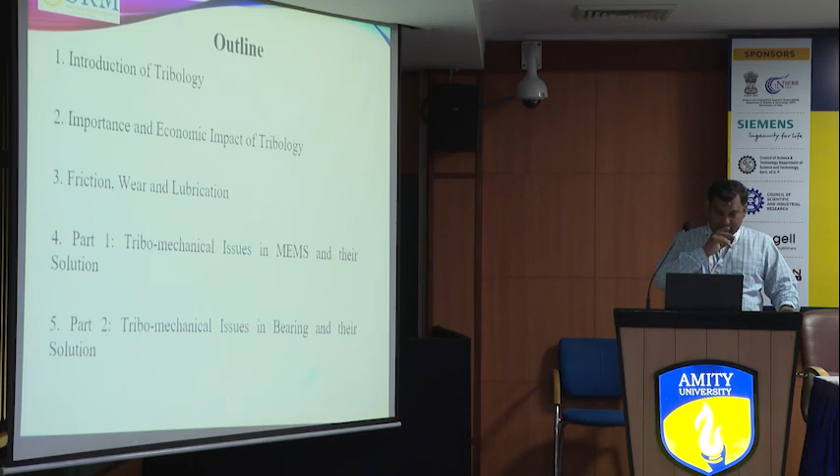So it means that your lubrication, whatever coating is provided over the hard disk, that is a silicon disk, is completely eliminated and your system is gone. So that's why tribology is everywhere. Wherever you want to apply it, just think of which area you want to work in. That is very important. So we show our two parts, our results, the tribomechanical issues in MEMS and their solution, and how we can improve the wear life without adding any lubrication. That is the main thing. So tribology is nothing but when two bodies are interacting with each other.

Then what happens when there is relative motion between bodies at the interface? Friction will occur. Due to that friction, frictional heat occurs, and that causes wear. How can we reduce this friction and wear? We can add lubrication. So it is known as the study of reducing friction and wear by the addition of lubrication.

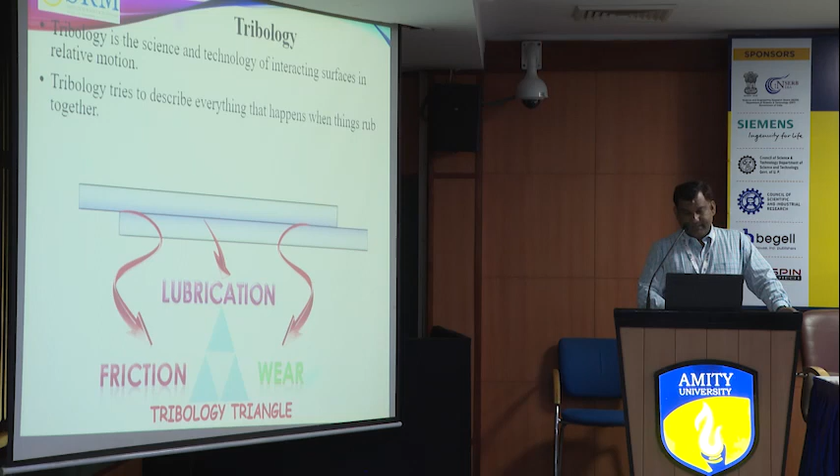This lubrication can be in the form of liquid, solid lubricant, or semi-solid lubricant such as grease. So lubricant is very important at the interface wherever relative motion is there. It is very important in terms of safety, efficiency, and reliability of components, and it is in all departments: whether you are in material science, biotechnology, civil engineering, automotive engineering, mechatronics, or any

department. So it is kind of an interdisciplinary field where you can work to enhance the reliability of the component, efficiency of the component, and sometimes safety, because in a car we require safety. That is very important. Also, whatever components we are using must have a longer life, because if the brake material fails very early, it is too costly in the car. So the life of the brake material should be high. That is called a friction material.

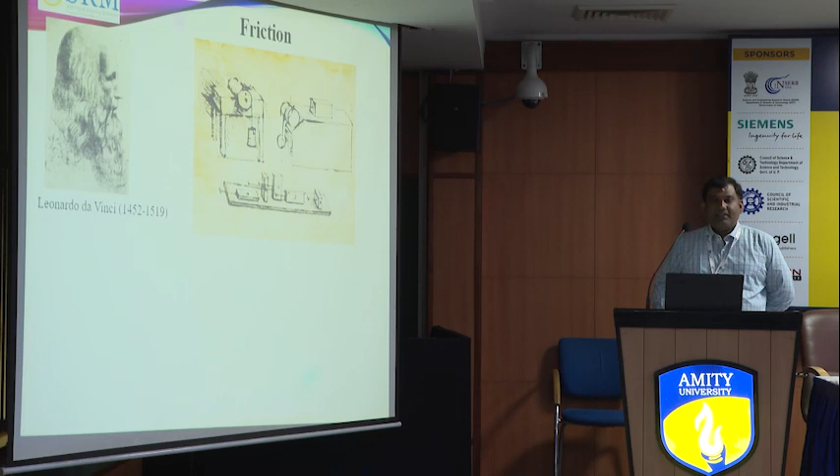Friction was first described by Leonardo da Vinci; he made sketches. These are the three sketches, which were later described by Amontons, so you know them as Amontons' laws. But Amontons only saw those pictures and wrote according to them, nothing else. Leonardo da Vinci was the first person who made such sketches. From this first sketch, friction is directly proportional to the normal reaction. Amontons' second law says that friction is independent of the surface area.

That is macro scale, but nowadays that law is not true, because it does not tell what type of area, either apparent area or real area of contact, because every material has its own asperities and surface roughness; no surface is perfectly smooth, whether metal or ceramic. So that's why nowadays it is changing to the real area of contact.

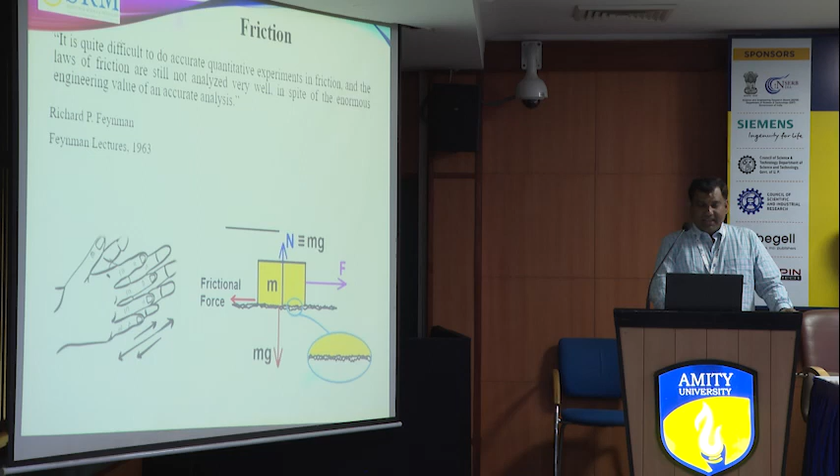So till now no such experiment has been developed where we can say that the friction is this much for that material. We can't quantify friction for the same material, because as I told you, the surface always has asperities, and maybe not all asperities are in contact, maybe only one or two on that particular surface. That's why whether you place your surface like this or like this, your friction never changes. And a simple example: when you rub your palm, it warms due to frictional heat.

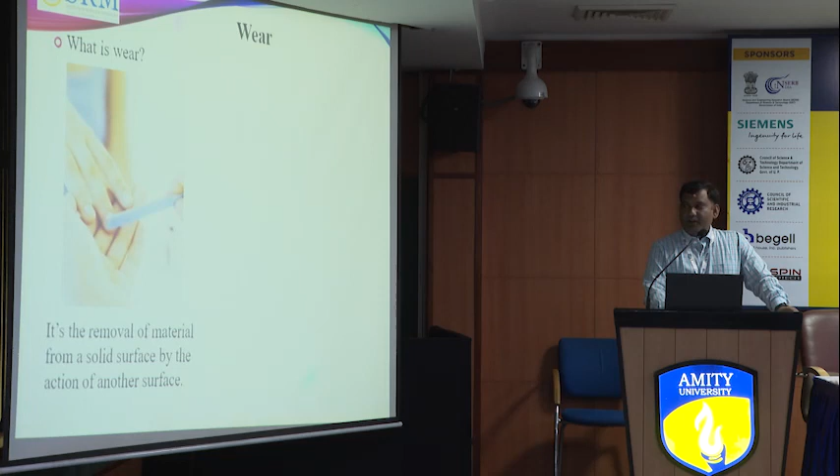In the famous 1963 lecture presented by Richard Feynman, he said that friction is still not well understood in this era. Another point: what is wear? Wear is material loss, just material loss. That material loss is known as wear.

Erosion is also one problem. Hydro turbines, in whatever hydropower plants we use in India or abroad, fail due to silt. That is due to erosion. So that is the basic understanding of what erosion and corrosion are. Erosion is a physical phenomenon, and corrosion is a chemical phenomenon.

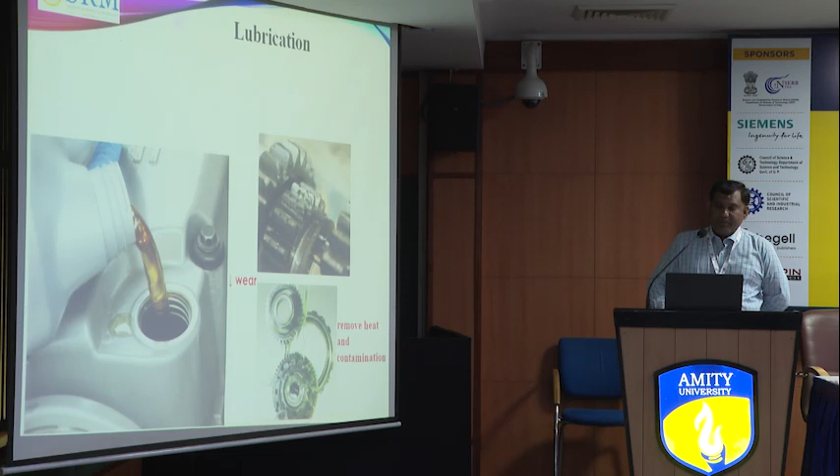Further, when we add a lubricant to enhance life, the function of the lubricant is to remove heat by increasing thermal conductivity, remove contamination, and remove debris from the surface, so that your material will not fail. There are four types of regimes, described by Stribeck, the German scientist.

Stribeck defined four regimes. When there is asperity contact and a very thin film between the two mating surfaces, that is known as boundary layer lubrication. Boundary layer lubrication occurs in clutches and bearings, where a very thin film occurs. Displaced boundary means your load is very high and the asperities are compressed. That is called a displaced boundary layer.

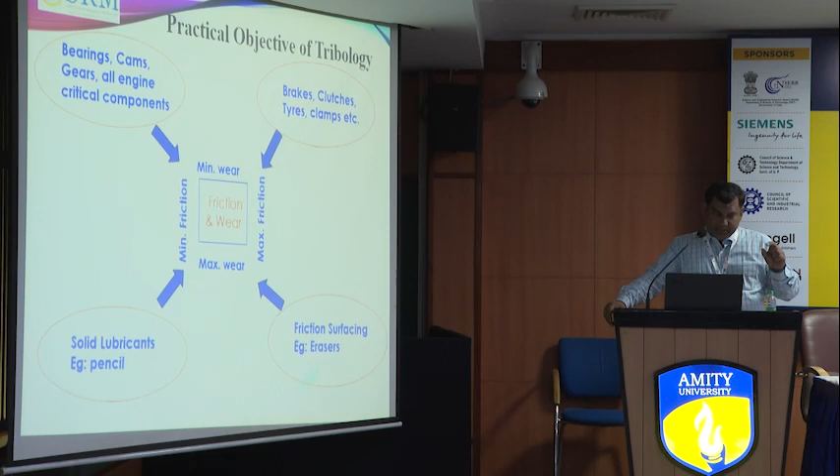Sometimes it requires minimum friction and maximum wear, like when you write with a pencil. When you write, you require less friction so you can write over the paper, but your pencil lead should wear, otherwise you can't write anything.

So these are the different areas depending on what area you want to work in and what is your objective. According to that, you can select the material and then select the proper parameters in that particular tribological field.

Nowadays we are using materials for fabrication of MEMS such as silicon, quartz, piezoelectric crystals, and polymers also. Polymer is like PMMA. There are two kinds of polymer: positive photoresist polymer or negative photoresist polymer.

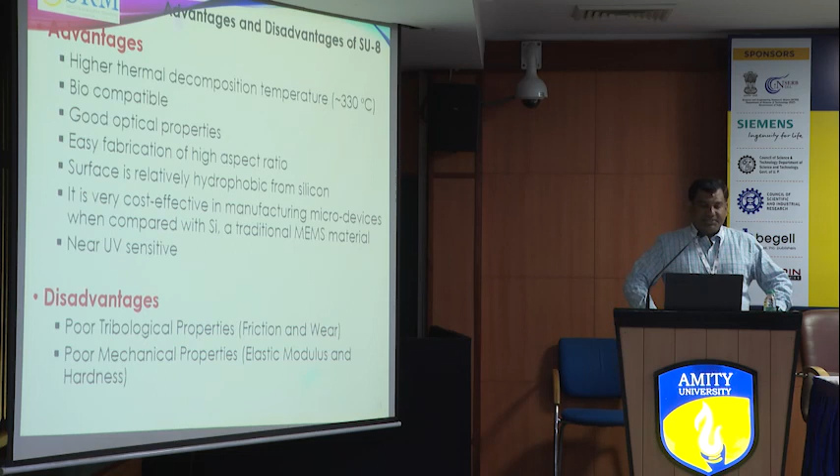The only disadvantage of SU8 is that it has poor tribological properties and poor mechanical properties. These are the only disadvantages. If we can improve these disadvantages, that material is very good for fabrication of MEMS components.

So in this work, what we did - this was my doctoral work, which I did during my doctorate at IIT Kanpur - I added graphite and talc.

Firstly, I added all carbon fillers. Then I found that graphite is good, either graphene or multi-wall CNT. Then in literature, I found that talcum powder, whatever you use on your face, the base talc, without adding any chemical, was also a very good solid lubricant. So I thought that because talc has the OH group, it very easily makes bonds.

So I thought to mix the graphite with talc in the same proportion, 5% meaning 2.5% talc, 2.5% graphite. So very good bonding happens because of the OH group present in the talc.

And I also found that for this research, without adding any lubricant, friction from SU8 has a 0.6 to 0.7 coefficient of friction. So by adding this graphite and talc, we reduced it to up to 0.2.

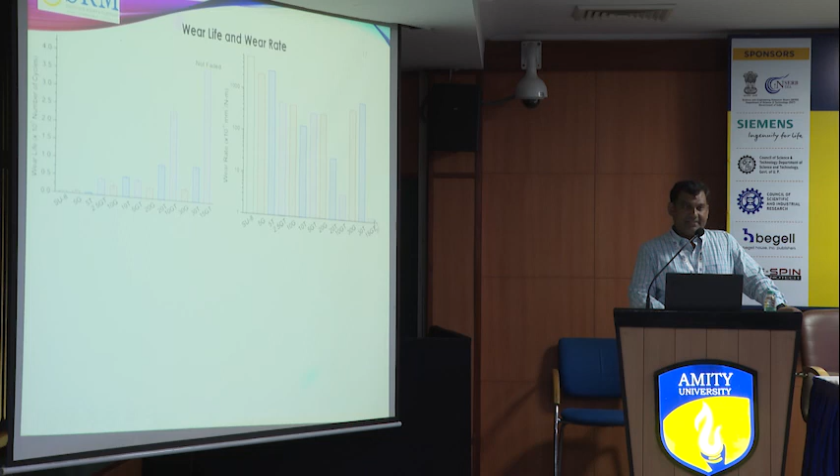But we were not able to achieve below 0.1 — that was the main goal. So we added a liquid filler also along with the solid filler. This work was done by my PhD student, and they used HBN, hexagonal boron nitride, known as white graphite, and added the liquid lubricant with HBN also.

Due to these nanotextures, the wettability is increased, meaning the surface — pure SU8 is hydrophilic in nature. Hydrophilic means water contact angle less than 90 degrees; hydrophobic means water contact angle greater than 90 degrees. Because of this addition of filler, the surface becomes hydrophobic, and we can achieve approx 95.7 degrees — that was hydrophobic in nature.

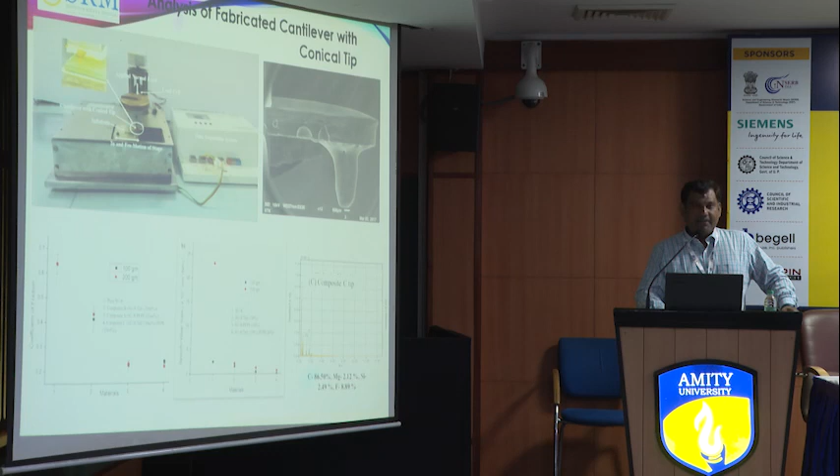Then after that I also fabricated the composite tip, that is micromechanical, we can see that is a few microns, 500 micron, and we obtained similar results, so we concluded that particular thesis. And similar EDX results showed that transfer of the fluorine is there, due to which your friction is less and life of the tip is also improved.

So now we move to the next part, that particular bearing. So why is there a need of tribology in bearings? It fails, it can create cavities due to low oil supply, due to poor running conditions. All these factors mean your bearing fails fast. So how can we improve it? And nowadays our green environment is very important, because when we are using bearings, we require external lubricant.

But nowadays government is telling that we can make the green environment. So how can we make the green environment? Only by not using more lubricant. So that is only possible by addition of the polymer.

So some researchers say coating is one solution. In coating, there are two types: hard coating and soft coating. Soft coating is good for coefficient of friction, but not good for wear, it will fail fast. Hard coating is good for wear resistance, but not good for the frictional coefficient. So what people have suggested in literature is that we can make a sandwich. We can use both properties. We can make hard coating, then soft coating, then hard coating and soft coating as per our requirement, at few nanometer scale. So that was the beauty. Then we can increase both, we can get low coefficient of friction as well as high wear resistance property.

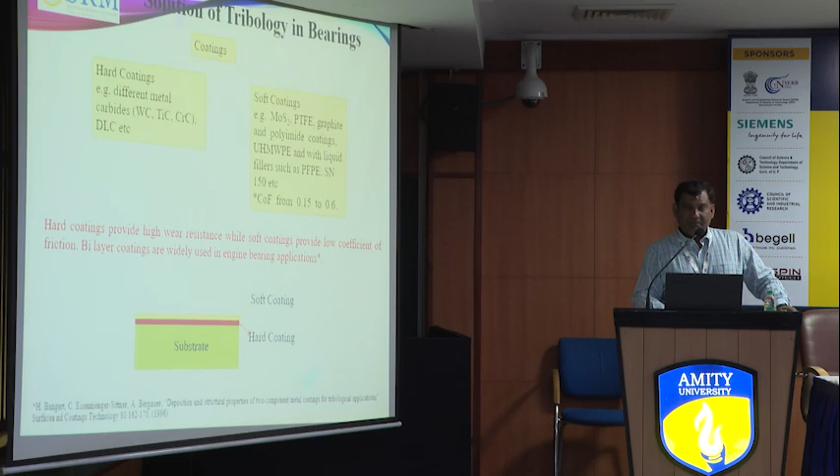So that was the solution proposed by researchers. And after that I also did adding the coating and water contact angle test. I checked it and it is hydrophobic after adding the filler. And you can also see that the elastic modulus is also improved. Then coefficient of friction, you can see EGSN means epoxy graphite, SN is the base oil, that is group 5, SN150 that is used in automobiles. And we can get 0.1 without any lubricant. And these tests I ran up to 24 hours. After 24 hours, I only get the data and that is presented. So approximately why it is there.

EGSN, you can see here the nanotextures are formed. Due to the nanotextures, the surface is hydrophobic, and due to the hydrophobic property, adhesion is less, and it shows low coefficient of friction. And wear is also very minimal, we can't observe it, and when we enlarge it, there is a very smooth surface you can observe. And it was tested at 2 Newton load. So these type of coatings are helpful for low load applications. High load applications, there is still a research gap in this field, so you can think of how we can develop for high load also.

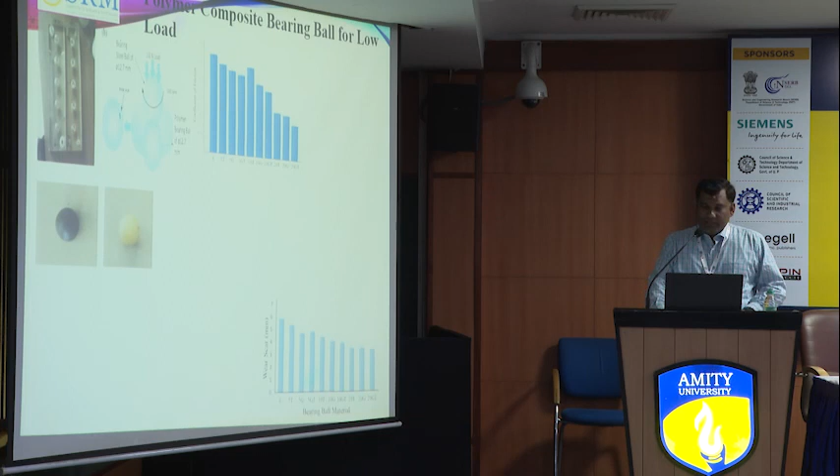Coefficient of friction, we can see here graphite talc still gives the lowest coefficient of friction. So here no lubricant we are adding. We are only adding the graphite and talc. And pure epoxy, you can see immediately it will fail, and sometimes due to the heat, it is re-solidified at the interface. So these are the observations which we observed.

But in case of the graphite and talc ball, we have not observed that much scar. Only plastic deformation occurs that changes the shape, but it does not wear out. Okay, so that is also used for low load applications, like in your chairs. You can use it where no lubrication is required. It is very helpful. And also if your wear scar is less than 4 mm, then it is in the acceptable range, that is the ASTM standard. So the graphite talc bearing ball is acceptable in nature.

And further we have tested for compressive strength and hardness of the polymer. You know that we only tested the Shore hardness test. We are not conducting Rockwell, Brinell or Vickers hardness test. That is only for metal. So for polymer, the Shore hardness test is only used as per the ASTM standard, and we observe that the graphite talc ball is good in terms of the compressive strength, and in terms of the wear scar also.

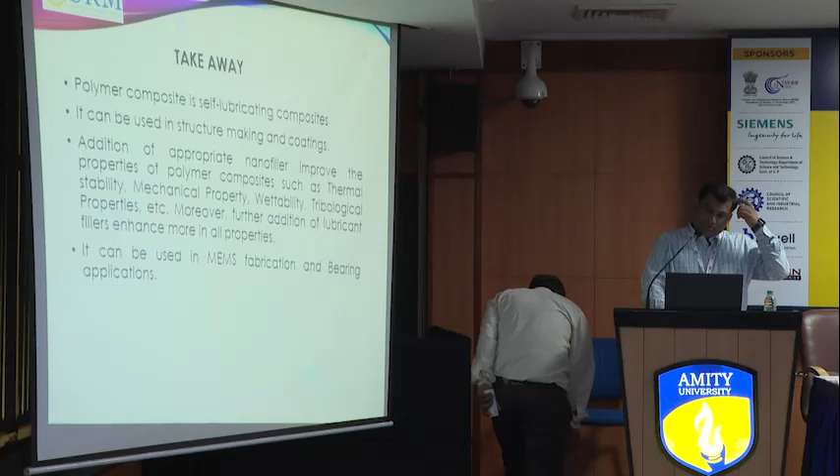So this is the final slide of my presentation. What is the takeaway, or what you can do further in your masters if you are interested, or in your doctorate. You know that the polymer is self-lubricating, and you can play with the fillers, and you can enhance the property as per your application. You can select the fillers, and after addition of fillers, either micro or nano fillers, you can enhance all the properties, and you can use this for MEMS fabrication and bearing applications.

Another way is the polymer paint, which we are doing in automotive. That research work one of my PhD students is still doing. He is going to develop the polymer paint for anti-wear, anti-corrosion, and antibacterial tests we will conduct, because in the automotive or transport sector we require antibacterial paint, so bacteria can be repelled. So you also maybe saw some advertisement from Deepika Padukone saying this is the antibacterial paint. Now no bacteria comes inside your house, it reverts back the bacteria from your house.

That type of development, Nerolac or Asian Paints, they are spending huge money in developing antibacterial paint. So that is one research work which recently one of my doctorate students is doing. That is for automotive application. They are developing the nanocomposite paint which can show antibacterial, anti-friction or anti-wear and anti-corrosion properties, because these three things are very important for any automotive. And that has succeeded also, because one BTech group did it, a startup based on that particular thing.

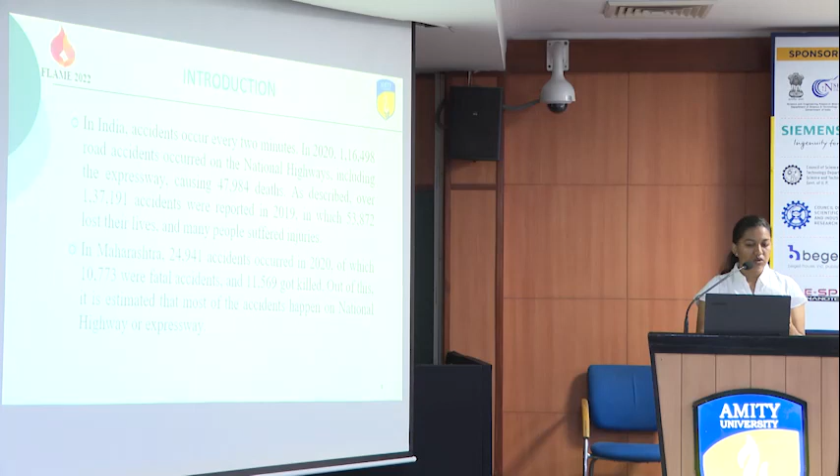So among all the accidents that are occurring in India, most of the accidents are occurring on national highways, state highways and expressways. So specifically in Maharashtra, 24,341 accidents occurred in 2020. So this is the latest data which was gathered from the National Authority of Highway, India.

So for this research, basically we identified the accident spots on the Nagpur-Amravati highway. So the names of these accident spots are 8th mile, Vardhaman, Chokardhani, Bajargaon bus stop, Junapani bus stop, Oriental Plaza, Karanja Gadge bus stop, Satnavari. So these are the accident spots which we found on the stretch of the 75 kilometers Nagpur-Amravati highway.

So some of these advanced technologies are suggested through this research paper, but very little research emphasizes such cases which happen due to lack of ambulance availability in the area or absence of ambulances. So the major problem with this Nagpur-Amravati highway is that ambulances are present, but in less amount. Also, in some areas there are no ambulances. So for this purpose, we are using the Minimax and K-means clustering method to identify the proper location of ambulances so that the response time after the accident occurs can be minimized.

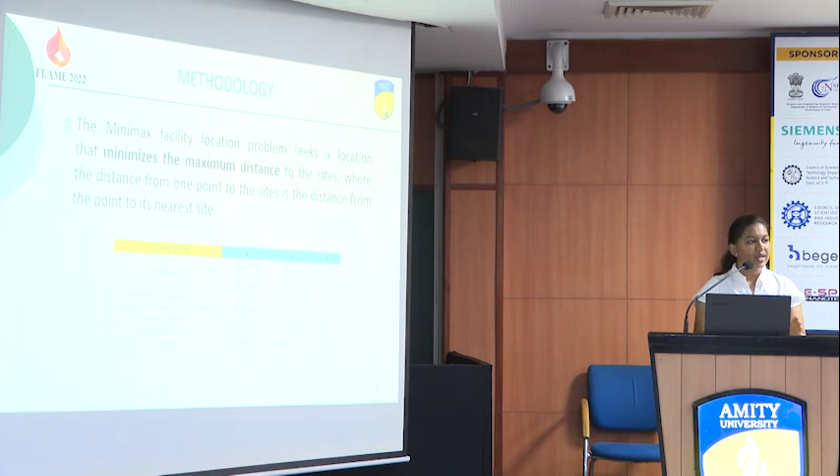So this is the Minimax facility location problem. This Minimax method is used to minimize the maximum distance between these 2 points. These are the accident spots which we identified, and this H represents the Minimax location for these accident spots. This minimax location is basically two coordinates, and the line joining these two coordinates will contain the ambulances.

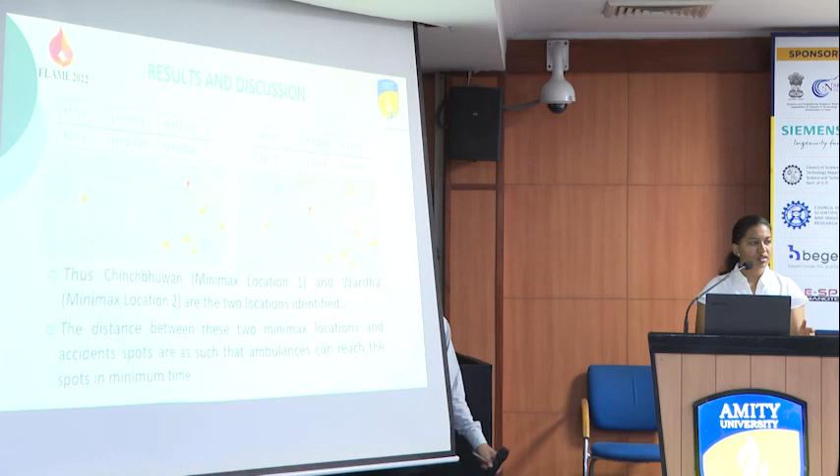So our result was that we found these two locations, which are Chinchbhuwan and Wardha. Placing the ambulances at these two specific locations can reduce the response time of the ambulances to reach the accident spots. Chinchbhuwan is for the first cluster, which consists of 5 locations, and Wardha is for the second cluster, which consists of 3 accident spots. We are trying to reach the authority so that we can conduct a survey of how much time can be reduced by placing these ambulances at the identified spots.

So this was the study that we did. These are the major references, some of which I mentioned while speaking about the literature review. Yes, thank you. Yes, sir. Any questions from the audience?

So you have used k-means clustering. Is any other algorithm available which will give better results? Sir, to evaluate if we are using a correct algorithm: k-means clustering will give us the number of clusters to be made. To evaluate if we are using the optimal number of clusters, we have used another method called the gap statistic method. To inspect if the number of clusters is optimal or not, there are basically 3 types of methods: elbow method, silhouette method, and gap statistics. So along with this, we are using the gap statistic method.

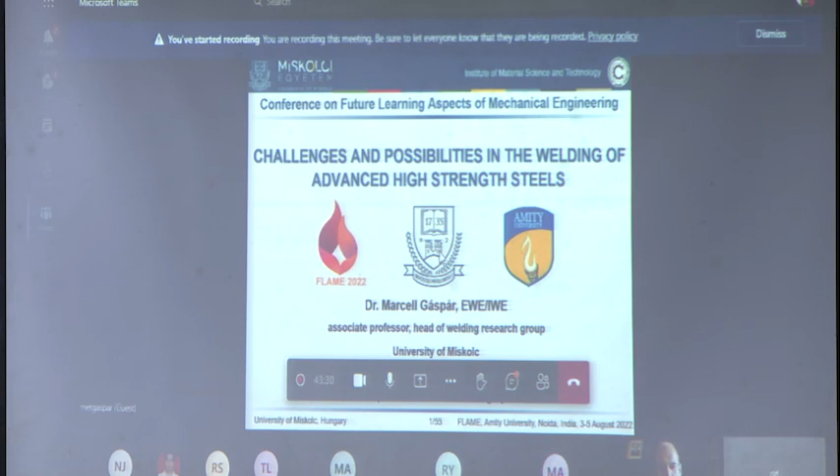Thank you very much. So it's a big honor to me that I can have this presentation today in India. Actually, I have a very good knowledge about your country. Even at our university, we had some colleagues from India, and I'm very interested in the country and also the technology development and university activities there. I really hope that in the future I will have the chance to visit the country.

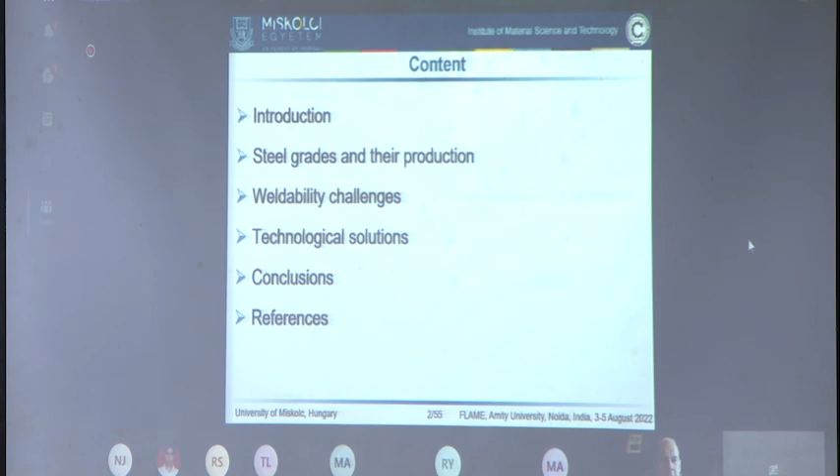In my keynote lecture, I will have a general presentation about the challenges and possibilities in the welding of advanced high-strength steels. In my presentation, I will have some introduction about our university and our research activity. Then I will have some information about different kinds of high-strength steel grades and their production processes. Then I will continue with the weldability challenges, and finally I will try to provide some possible technological solutions for how we can handle these new generations of high-strength steels.

And besides the automotive industry, there is also the production of trains, for example at Alstom or Stadler. So there are a lot of companies working in this automotive sector, and you may know that most of the application of high-strength steels can be connected to the vehicle industry.

Some small information about our university. The University of Miskolc was among the first technical universities of the world. Actually, our predecessor was established in 1735 in Selmecbánya, which today belongs to Slovakia. And then in 1949, the university moved to Miskolc, to my hometown. And nowadays we have 9,000 students in 8 faculties.

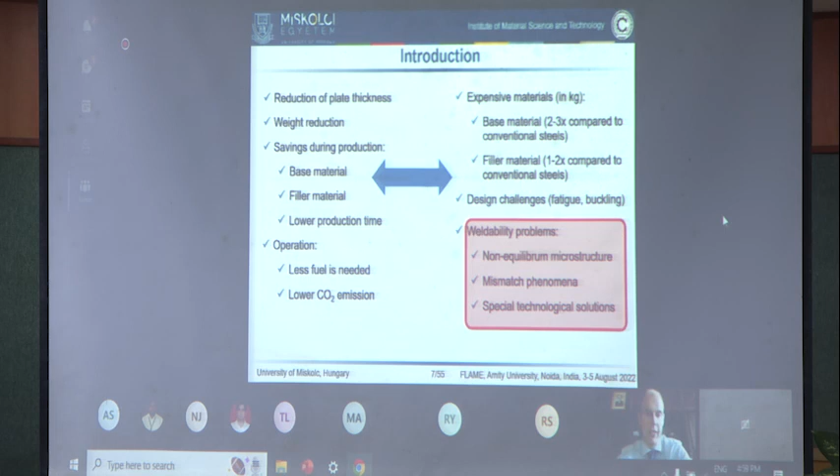Weldability is also a hot topic. Basically, these steels have a non-equilibrium microstructure, mostly martensite-bainite microstructure, and different kinds of variations. Even sometimes some austenite content can be identified in the microstructure. The mismatch phenomenon is also a hot topic, how we can select the proper filler material for the welding. And of course, special technological solutions are needed to have at least similar strength and toughness of the joint as the base material. In my presentation, I will focus on the weldability topics, but based on this screen, you can see that it's a more complex problem. And now I would like to continue with the introduction of different kinds of steel grades and their production.

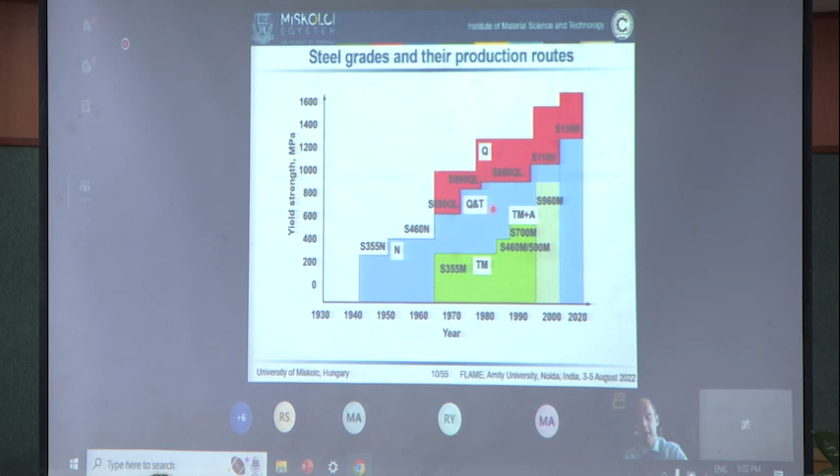As you can see, with this technology, we can reach nowadays even 960 megapascal. So there is approximately a 15-20 years difference between achieving the same strength grade by the different kinds of technology, but the TMCP process can be considered as quite competitive compared to quenching and tempering.

Related to the production processes, during normalizing we are using a simple heat treating process with one cycle. We go up to the homogeneous austenite region, and then we use simple air cooling.

In case of quenching and tempering, we need to use much faster cooling. Therefore, water cooling is used, followed by high temperature tempering under the A1, producing martensite after water cooling, and then tempering to create a more equilibrium microstructure with some carbide precipitates. This is generally called sorbite.

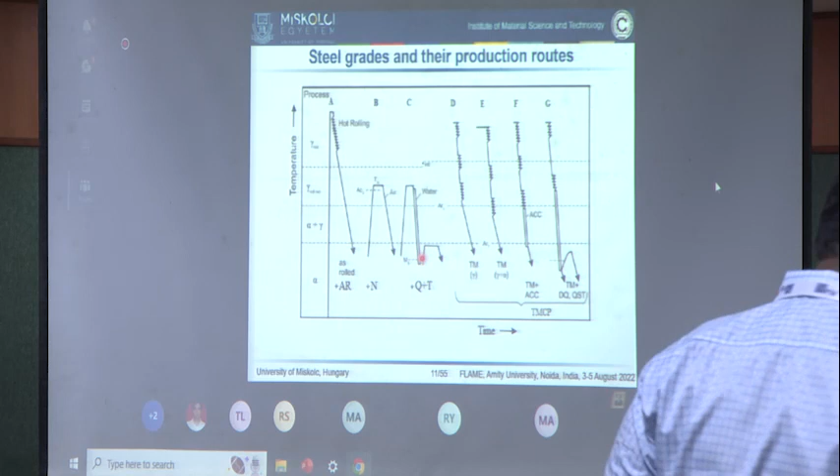Related to the TMCP process, different kinds of processing routes are available. Generally the process always starts with hot rolling, but then the rolling process continues even at much lower temperature, around the A3 temperature, and sometimes even below the A3 temperature. Then very fast cooling is used. Therefore, an extremely low grain size can be achieved with this technology.

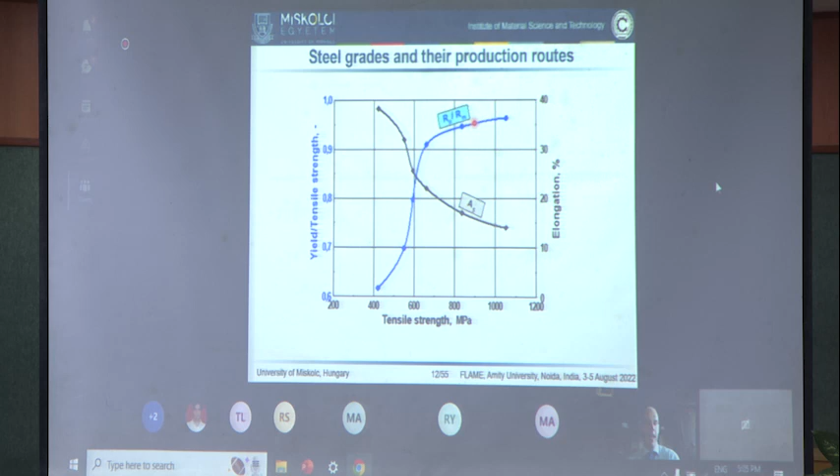When we would like to apply high-strength steels, we should consider that with increasing strength, generally the elongation, so the ductility, is reducing. If we compare the ratio of yield strength and tensile strength, we can see that above 600 MPa this ratio is quite close to 1, meaning there is no plastic difference between the yield strength and the tensile strength, and in parallel the ductility is reduced as well.

How can they achieve these high strengths? Besides the processing routes, different kinds of alloying elements are needed. Firstly, I should highlight the substitutional solid solution elements, such as manganese, silicon, chromium, or molybdenum. Besides them, there are also interstitial solid solution elements, of course carbon, and in some cases nitrogen.

Microalloying elements have a very important role in high-strength steels, especially in high-strength low-alloy steels. We can find aluminium, titanium, niobium, vanadium, and boron in this kind of high-strength steel. Especially in the quenched and tempered group, we can find boron in order to increase the hardenability, the so-called quenchability, of high-strength steels.

The steel producers generally focus on reducing the sulfur and phosphorus content in order to have high toughness in these steels, and they are also using, as I mentioned before, heat treating and thermomechanical rolling.

With these technologies, a very fine-grained microstructure can be achieved, which is generally a non-equilibrium microstructure with a combination of martensite and bainite, but also different kinds of carbides, retained austenite, and in some cases ferrite can be identified in these high-strength steels. Some measurements have shown there is also a higher dislocation density in the material, which results in higher strength, and there are precipitates thanks to precipitation hardening alloying elements such as chromium or molybdenum, which can be considered carbide former elements.

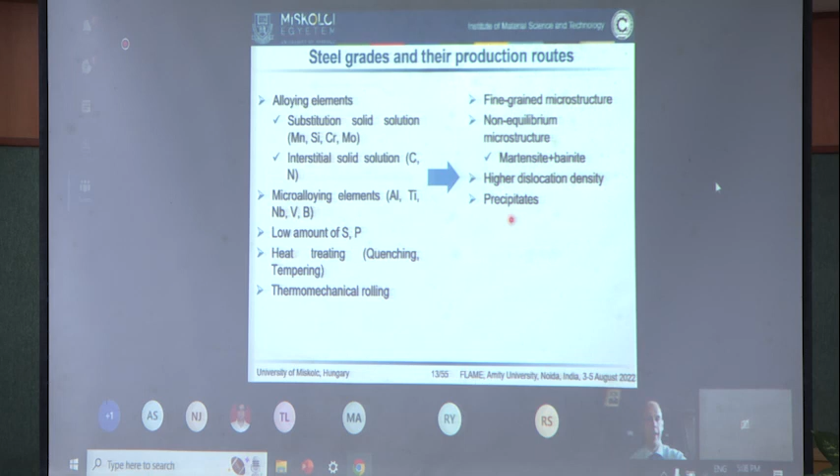Now I would continue my presentation with the weldability challenges. If we consider the weldability of different kinds of structural steels, the best option is to use the Graville diagram.

This diagram has three areas. In the first area you can find those steels which are very easy to weld without controlled heat input and preheating. In the second zone you can find steels which are a bit more problematic, but generally they can also be welded without any cold cracking. And in the third area you can find the most sensitive steels, where high cold cracking sensitivity is identified and where you need to use preheating and also controlled heat input.

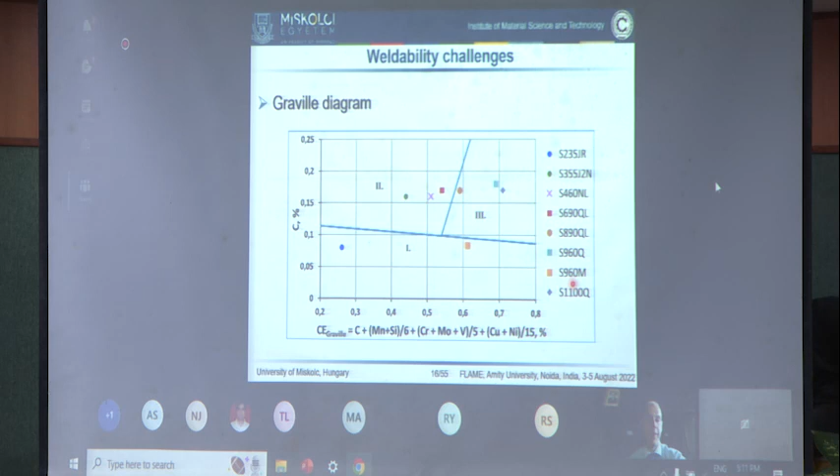If we consider quenched and tempered steels and TMCP steels of the same strength categories - for example the 960Q steel, which is located in area 3, and the 960M steel, which is located in area 1 - we can conclude that the thermomechanically rolled steel from the same strength category is less sensitive to cold cracking and therefore much easier to weld, even without the use of preheating.

The third interesting topic is the filler metal selection, the so-called mismatch ratio. It's always a question whether we need to use a matching, under-matching, or over-matching filler metal, and in which kind of filler metal we can make a better quality joint in terms of the different kinds of loading characteristics.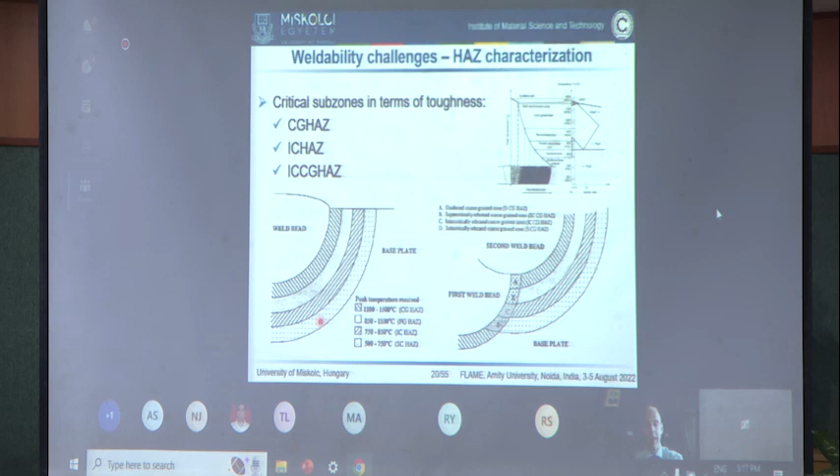During the weldability challenges, the heat-affected zone characteristics are always in focus of the research. In terms of toughness properties, generally the coarse-grained heat-affected zone, the intercritical heat-affected zone, and the intercritically reheated coarse-grained zone are considered as those areas of the joints where there is the lowest toughness.

This kind of intercritical coarse-grained zone can be formed when there is a multipass weld, and you can see that after the first weld bead there will be a normal coarse grain zone, but due to the heat input of the second weld bead it will be heat treated again. That part which will have intercritical heat treating - this will be the so-called intercritical coarse grain zone, where generally a large amount of local brittle zones are formed in the welded joint.

Here you can see that in case of the 960 quench and temper steel, we performed optical microscopic analysis and microhardness examination on a real welded joint, and we can identify that in this intercritical coarse-grained heat-affected zone, the inner part of the grains generally softens compared to base material, having a hardness of maybe 200, 260.

But at the original, the primary austenite grain boundaries, where these local brittle parts, mostly martensite-austenite parts, form, the hardness can go up even to 360, 330. So this is showing the special characteristic of the microstructure, which should be focused on during the research.

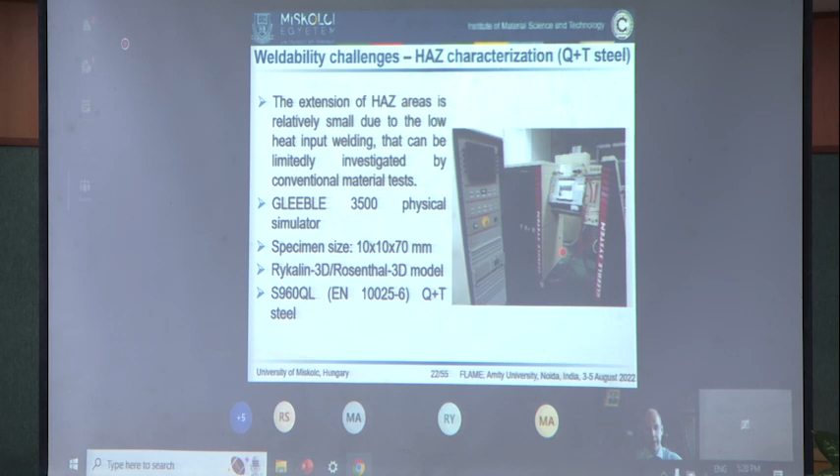During our experimental work, we analyzed the heat-affected zone characteristics of this 960 quenched and tempered steel. For the coarse-grained heat-affected zone, we used a 1350 degree peak temperature. For the intercritical heat-affected zone, 775 degrees Celsius peak temperature, and we used a combination of these for the intercritical coarse-grained zone.

We analyzed the characteristics of the heat-affected zone based on the T8/5 cooling time, which is very crucial in welding, because this is the cooling time between 800 degrees Celsius and 500 degrees Celsius.

Generally, 2.5 seconds illustrates laser beam welding or electron beam welding circumstances, while 30 seconds or 100 seconds can be relevant for submerged arc welding or other high heat input technologies.

Here you can see the simulated heat cycles for the coarse grain zone, the intercritical zone, and the intercritically reheated coarse grain zone. All of these curves were generated based on the Rykalin or Rosenthal 3D model.

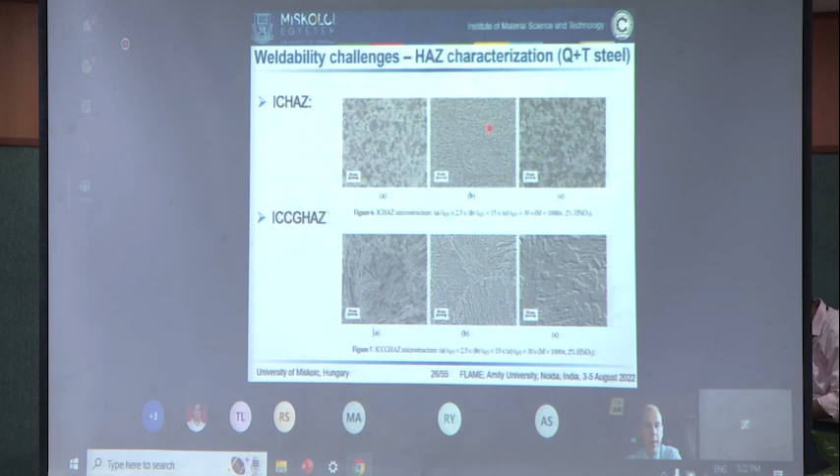If we consider hardness properties in terms of cold cracking sensitivity relative to base material, we can say that as we reduce the heat input, hardness increases, but generally there is no risk of reaching the requirement of 450, which would indicate high cold cracking sensitivity. Softening generally does not occur much in these steels, though sometimes with high heat input in the intercritical zone, some softening can occur.

Compared to 960 versus a conventional S355, we can see that at medium or high heat input, there is a large difference in the hardness of the coarse grain zone. But as we go down with heat input and cooling time, the hardness values become quite close to each other.

Regarding impact energy and Charpy V-notch test results, we can say there is a very significant toughness reduction in the heat-affected zone. The base material often has toughness even 160 joules at minus 40 degrees, but generally the impact energy values decrease to the level of the limit of the governing standards.

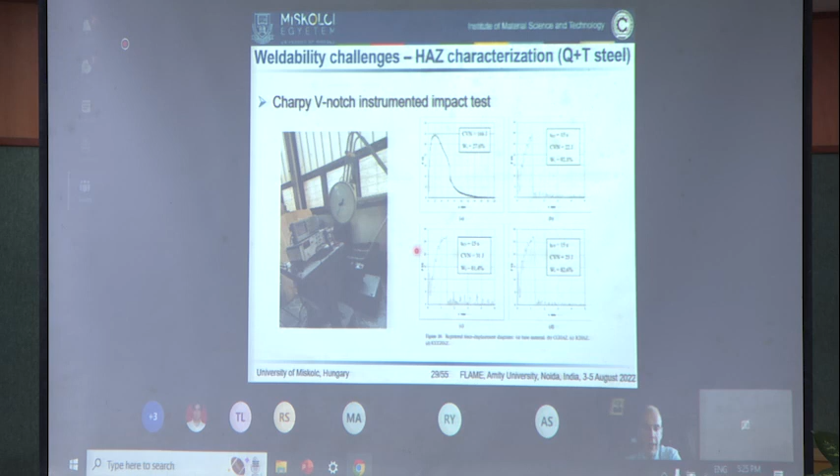But in the heat-affected zone, the coarse grain and intercritical heat-affected zones always behave very brittle, as you can also see in the fracture surface of the Charpy specimens. There is no real plastic deformation, so it's a very brittle, cleavage-like fracture.

Therefore, it's very important to minimize the extension of the heat-affected zone, because the heat-affected zone is very brittle in this kind of quenched and tempered high-strength steel.

Besides quenched and tempered steels, we performed analysis on dual-phase steels applied in the automotive industry. From DP800 to DP1400, different grades were observed at 5 and 30 second cooling times. In these dual-phase steels, hardening is relevant mostly in the coarse-grained heat-affected zone when low heat input is used, so generally the 5 second cooling time.

But as we increase the cooling time, there won't be any hardening in the heat-affected zone; furthermore, the heat-affected zone will rather soften. Since in the automotive sector mostly resistance welding and laser beam welding are used, the 5 second cooling time is more relevant for the user compared to the long cooling time. Therefore, we need to focus a bit also on the hardening of this heat-affected zone as well.

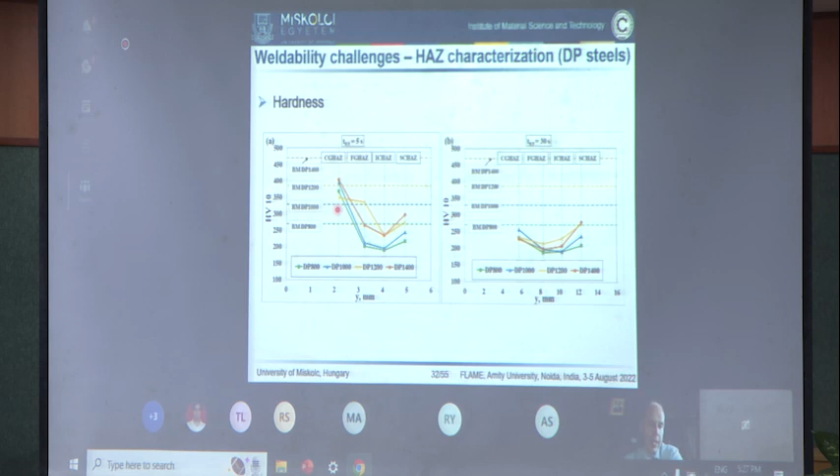Now, after seeing the challenges in the weldability and welding, let's see how we can handle these problems. In conventional gas metal arc welding, of course, we need to use preheating, especially for quenched and tempered steel. For preheating, we use different kinds of methods. We need to use a limited welding heat input, and we need to consider the optimal t8/5 cooling time range of the steel producer.

We need to use a strictly limited interpass temperature in multipass welding, and if it's possible, we need to use advanced pulsed welding technologies. As you can see, the welding parameter toolbox is very small, so the parameters can be selected from a very narrow range.

During our experimental work, we analyzed the possibility of post-weld heat treating. Actually, with the Gleeble simulator, we tried to analyze what's happening in the heat affected zone if we are using a kind of tempering heat cycle. So we used the 650 degrees Celsius peak temperature tempering after the coarse-grained, intercritical and intercritically reheated coarse-grained zone.

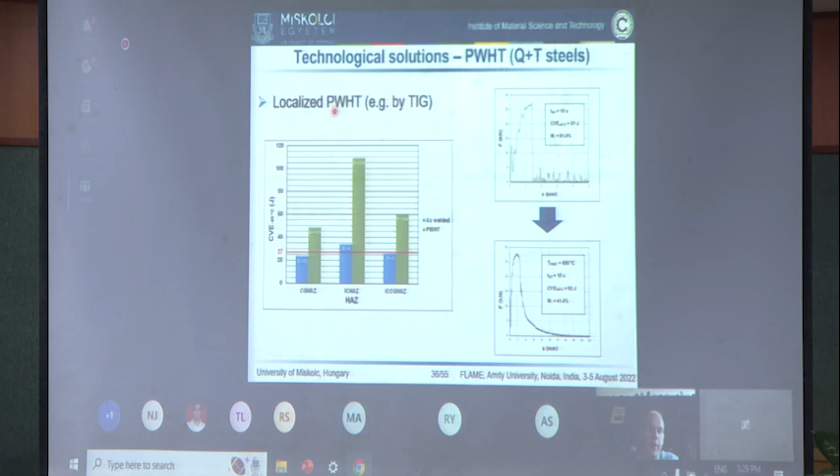As you can see, in all investigated subzones, after post-weld heat treating, the toughness improved a lot. You can also see it in the graphs. This was the original intercritical heat affected zone force displacement diagram during impact testing, and this one is the force displacement diagram after post-weld heat treating. You can see that the intercritical heat affected zone behaves fully ductile after this localized post-weld heat treating.

Localized post-weld heat treating can also be performed, for example, in industrial practice by laser. Here you can see one of our experimental works when diode laser equipment was used for the welding of different kinds of dual phase steels. And after, with the similar diode laser equipment, we performed localized post-weld heat treatment at a top temperature of 650 degrees Celsius. Here you can see some information on the parameters.

You may know that diode lasers are very advantageous because the heated area, the spot size, can be adjusted in a wide range. So for welding, we use the 2 by 2 mm spot size, but for post-weld heat treatment, we use a much larger rectangular shape based on the weld and heat affected zone area.

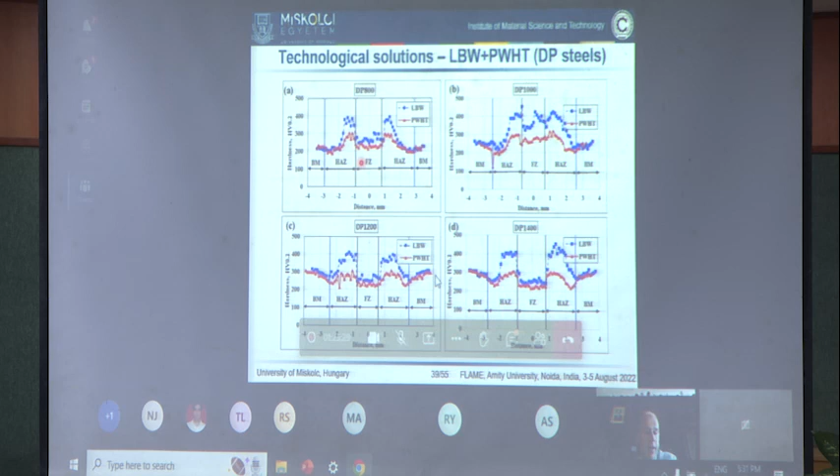Here you can see the consequence of the localized post-weld heat treatment on the different grades of DP steels. You can see that the peak hardness in the coarse-grained and in some cases in the fine-grained heat-affected zone can be reduced to the level of the base material. So the localized post-weld heat treating by laser is very advantageous to reduce the hardness, reduce the cold cracking sensitivity, and probably increase the toughness of the heat affected zone.

Here you can see some information about the tensile test results. These joints were performed as autogenous welding, so filler metal was not used. However, with filler metal, even better tensile results can be achieved.

If we examine the residual stress distribution, the longitudinal stresses and the transversal stresses by X-ray diffraction, we can see that thanks to the post-weld heat treatment, the tensile residual stresses can be reduced even to the level of zero. So from tensile stresses, we can make mostly compressive stresses in the welded joints close to the surface, which can be very advantageous for fatigue loading.

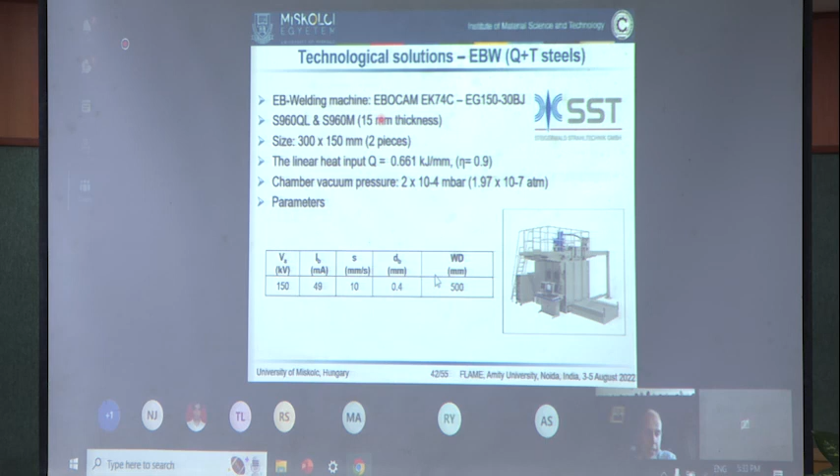Our last example will be a solution for electron beam welding of thicker high-strength steels, so for quenched and tempered and TMCP high-strength steels. With electron beam welding, we can use a one-pass welded joint, even at a thickness of 15 millimeters. Here you can see the experimental circumstances in the vacuum chamber of the equipment, and here you can see a result.

If we compare the hardness distribution in an electron beam welded and a gas metal arc welded 960 quenched and tempered steel, we can see that in electron beam welding, in the fusion zone and heat affected zone, there is a significant hardening, but not above the permitted 450 Vickers limit. In GMAW, the hardness is much more variable. On the face side of the joint, the values are close to 450 Vickers, and on the root side, thanks to the multipass welding, not hardening but rather softening occurs close to the root.

If we consider the tensile strengths, we can say that by EBW, the same strength joint can be produced as with GMAW without the application of expensive filler metal.

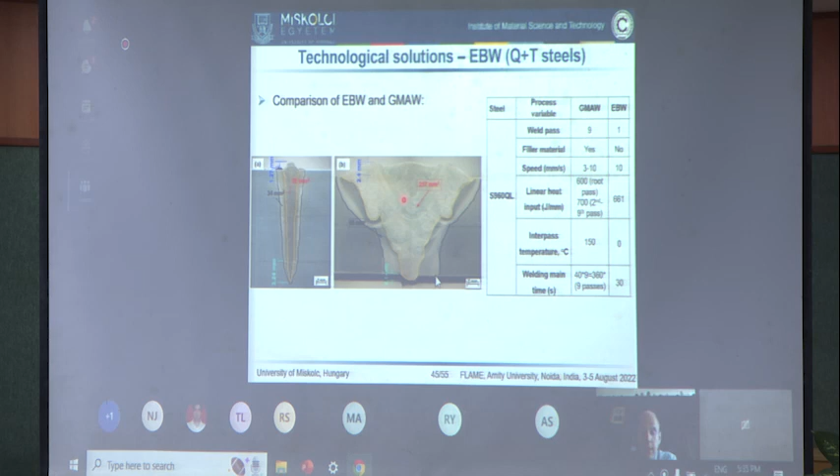Furthermore, here you can see a comparative study of the characteristics of weld shape. We can say that by electron beam welding, the weld size is 10 times smaller compared to GMAW, and the heat affected zone is also 3 times smaller compared to GMAW. So, in total, the mechanical properties won't reduce down so drastically compared to

conventional arc welding technologies. If we compare the characteristics of the 960 grades in quenched and tempered and TMCP condition, we can say that TMCP high-strength steels are very ideal in terms of the hardness. There is no significant hardening in the weld and in the heat-affected zone compared to quenched and tempered steels.

And if we analyze the impact energy values, we can also see that by the thermomechanical rolling, in most cases, the toughness characteristics of the welded joints are better compared to quenched and tempered steel. However, some brittle parts are also identified in the weld or in the heat-affected zone, but in total, the absorbed energy is generally higher, and the TMCP high-strength steel welded joints are more ductile compared to the quenched and tempered grade of the same category.

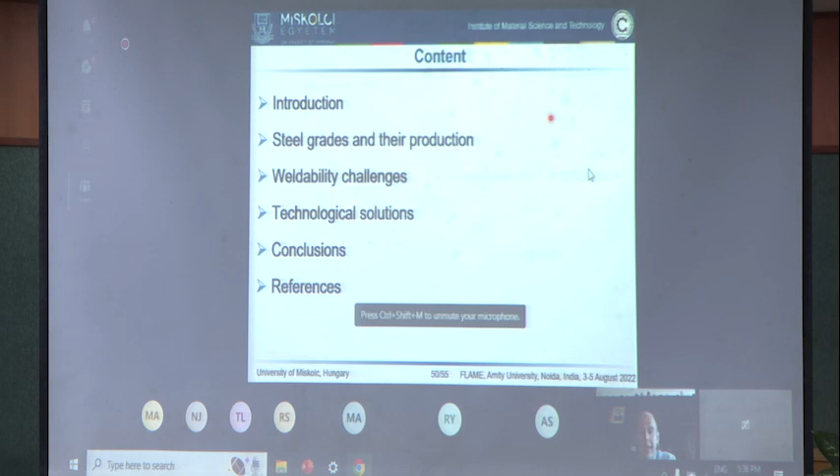Here you can see also the fractography analysis and the geometry of the Charpy specimen, the fracture surface. Generally, a larger amount of plastic deformation is identified in TMCP steel of the same strength category. So finally, in the last slides of my presentation, I would like to summarize the main conclusion of the challenges and possibilities of the welding of high-strength steels.

As we could see, there is a strong relation between the steel processing route, weldability, and the recommended welding technology. TMCP-rolled steels seem to be less sensitive to welding heat input in terms of the deterioration of mechanical properties in the heat-affected zone compared to quenched and tempered steel. Heat-affected zone brittleness cannot be avoided in quenched and tempered steel. Its extension should be minimized.

And within the GMAW process, advanced boost technologies can be very useful for the welding of high-strength steels, especially with low heat input, and the application of beam welding technologies can be advantageous. On the one hand, due to the minimized area of the weld and the heat-affected zone, and on the other hand, because localized post-weld heat treatment can be performed by the same heat source as the welding.

Here you can see some references of our work about the welding and materials testing of different kinds of high-strength steel grades. And thank you very much for your kind attention.

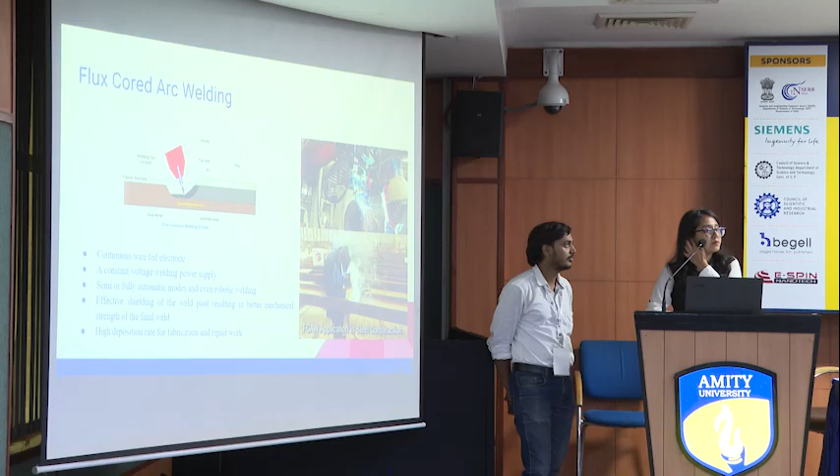Flux cored arc welding. During the process of flux core arc welding, a continuous wire-fed electrode is fed on the base material through a spool. A constant voltage welding power supply is maintained. This method can be automatic, semi-automatic, or it can even use a robotic arm. In this process, we usually use a shielding gas to prevent the weld from oxidation.

So coming to angular distortion, when we weld a plate or any base material, the point where the welding is taking place has a high heat, but at the ends of the plate, the heat concentration is low, thereby making a heat gradient, and when the heat is cooling down, the cooling rate differs because of the heat gradient, which makes the contraction at the center more than at the corner of the plate, which leads to angular distortion.

Angular distortion is very catastrophic, as if we do not treat this angular distortion, it can lead to high stresses in the pressure vessels or any steel that we are using, even in the automobile sector. We have selected stainless steel 301, which is austenitic, because it has good ductility, high strength, and it is highly used in industries for making pressure vessels and automobiles. For the filler material, we have used 308L filler material of diameter 1.2 mm.

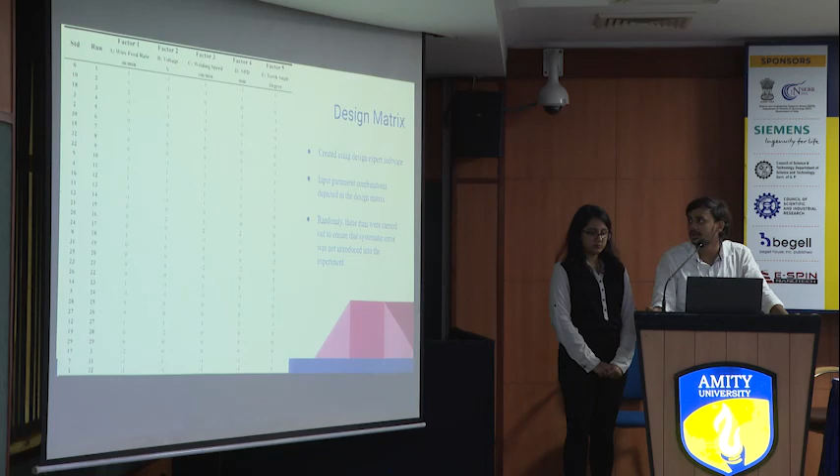Pradeep Khanna. So coming to our next session, this is the design matrix, and the design matrix was created using a design of experiments technique, and the software which we use here was Design Expert. And this is the design matrix. As you can see, there are different parameters. We took 5 different parameters.

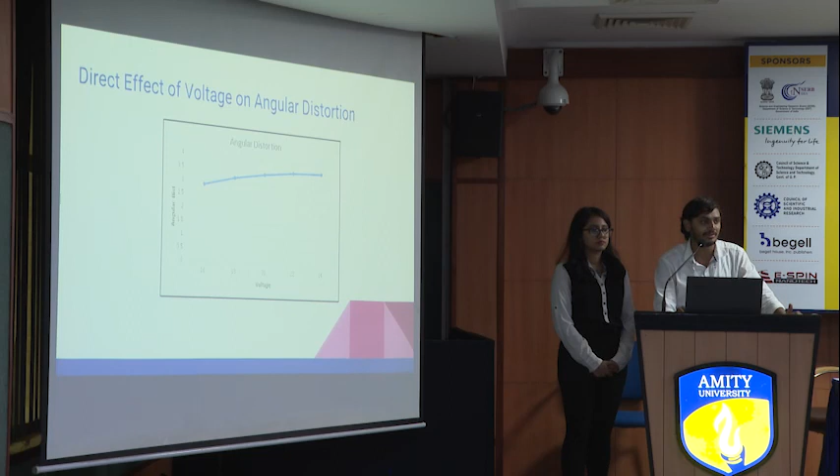By increasing the welding speed, the angular distortion was decreasing, and by increasing the nozzle to plate distance, that is the arc distance, the angular distortion was significantly decreasing. And by the direct effect of torch angle, we can see a slight increase and then a dip in the angular distortion. After the single factors, we took 2 factors at a single time to get a relation between them. So I would like to ask Drishti to explain these plots.

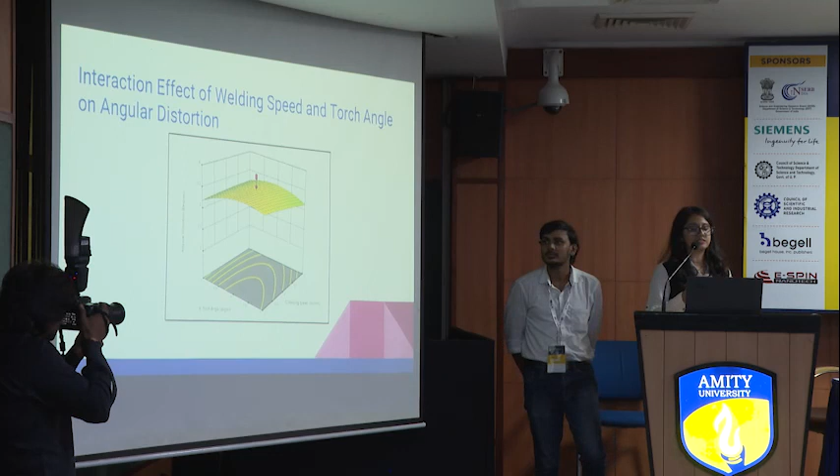In this, if we decrease the welding speed and increase the torch angle till a certain point, the angular distortion will increase, and after that, even if we increase the welding speed and increase the torch angle, the angular distortion will fall.

The conclusion was pretty simple: we used the CCRD technique, central composite rotatable design, which proved to be very helpful while developing the mathematical model to predict the angular distortions for our given input variables. Input variables were welding speed, voltage, nozzle to plate distance, torch angle, and wire feed rate.

When we increase torch angle, welding speed, and nozzle to plate distance, the angular distortion was having an inverse relation. On the other hand, there was an increment in angular distortion with the increase in wire feed rate and voltage. The optimized results are shown here. The least angular distortion was obtained at the following input parameters. These were the references, and we are open to questions.

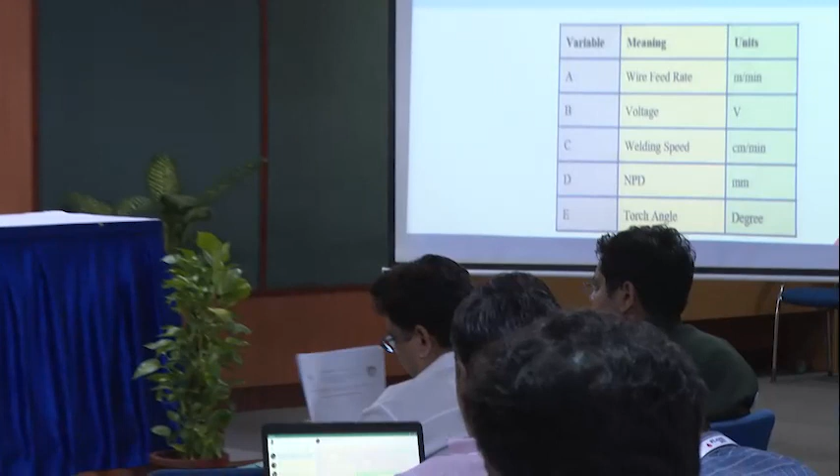Have you compared the result obtained from this mathematical model with any published research work? Similar type of work has already been documented, whether in the form of experimentation, not in this form, but using this model. Have you checked how much variation there is in that result? Okay, so before developing this mathematical model, we did a literature survey, and in that survey we saw that many of these types of mathematical models, which are for different materials, are generally quadratic and have a significant value of R square, greater than around 80.

Have you introduced any comparative study related to results in your work? No. Okay. You can enrich your work by adding this, and it's the most important part, because whatever we deliver in the scientific community should have significant relevance, and that relevance comes from validation or comparison of our work with others. Once it gets validated, then it's named by your work. Okay. Thank you so much.

Thank you so much, Drishti and Aryan. So I would like to call paper ID 154 and 153, Dr. Sachin Mahakalkar. Please come on the stage. You have given it in the same PPT? No, this is 154 now, 153 is a different paper. Have you given it to him? But it is in a separate folder. Okay, alright, this is good. So it's here, and you can change that. It's 153. The next one. I do 154. Same only.

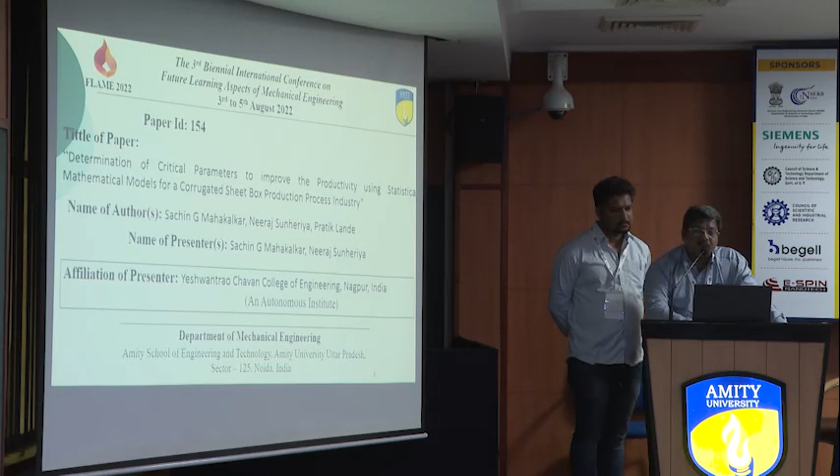And everywhere it is seen that man-machine systems are used in these industries. Nowadays, because of transporting cost, these types of industries are normally set up beside the industry so that you can reduce transportation and directly send the corrugated boxes to the industries. The introduction part is the corrugated scenario in the Vidarbha region. We have come across many industries where we have seen similar types of man-machine systems.

There are various machining processes like making the corrugated sheet, then the folding or slotting machine, then a gluing machine, then a stitching machine, and that's how the boxes are made. If you take a case study of that overall, you find there are so many input parameters which, if we minutely observe and improve them, naturally the productivity can be improved. So the manufacturing process includes all these machining processes which I have talked about.

Then the identification of the parameters. The corrugated box sheet, all of you have seen, is made up of 80 GSM paper, which is normally purchased from Ballarpur Paper Industries. And these papers, depending upon what weight you want to carry inside the box, will decide whether you have a 3-ply box or a 5-ply box, and you can also have a stacking type, for example, if you are transferring bottles or any other components inside these corrugated boxes.

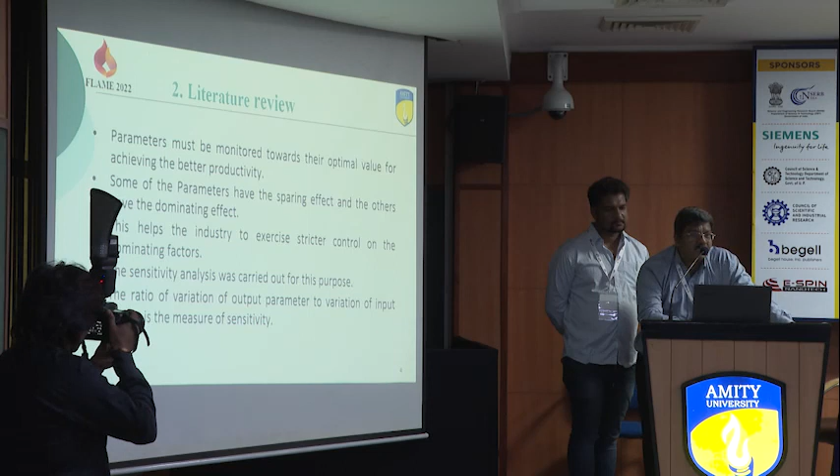So for that, we decided to carry out the sensitivity analysis and find some dominating parameters among the 43 parameters. That was the main objective of this research. We went through many research papers wherein, for the mathematical model, some used the regression model, some used the dimensional model, response surface models were also used, and some validated through the ANN model.

So we formulated these 43 input variables, and then we thought about what the output should be. Because every machine was operated by machine operators, human beings, we decided on the human pulse as the output. We took the pulse energy at the start of the shift, and similarly the pulse energy at the end of the shift, and this human energy was our output parameter. Then a model was set up with the 43 independent variables and the human energy as the output variable.

Once the model was set up, we studied the models, because we always want human energy to be used minimally while working through the shift. So minimization was our main focus. We found some 13 or 14 parameters from every model, the regression model, the dimensional model. And out of these 13, 14 input parameters, we decided to find the critical parameters.

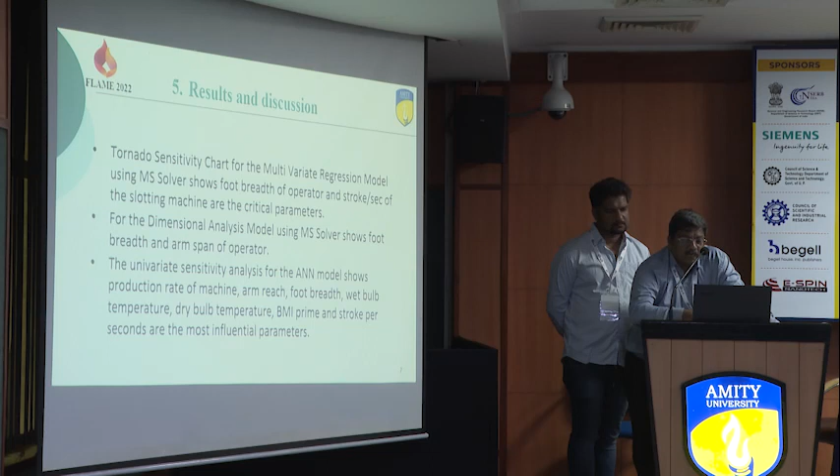So we used the sensitivity analysis, using the MS Solver as one technique and using partial derivatives. We took these 13 parameters, each parameter was varied by plus 10 and minus 10%, and we saw the effect of these parameters on the output, that is the human energy. The MS Solver gives us the tornado sensitivity chart, and in descending order you get the critical parameters at the top. That's how we identified them out of these 43 parameters.

I haven't shown it, but I can show you; I have the paper, because there was a limitation. But you are directly going to the conclusion. You should include the model and the calculation. Actually, sir, the model was not really the focus, it was the sensitivity analysis which was the main focus of this research. But in the presentation it should be included. It's surprising. There was a limitation that only six slides were given. I was waiting for your model and charts to come. But the result part, this is only the conclusion. There is no result.

You are talking about Solver, and again you are talking about ANN, so many things, so many parameters, 43. Before making any presentation, it is very necessary to include all these results. Actually everything is in the paper, but because of the slide limitation. No, but at least every paper normally gives it. Yes, no problem, I accept your suggestion. I only thought it was a limitation, instead of putting 20, 25 slides.

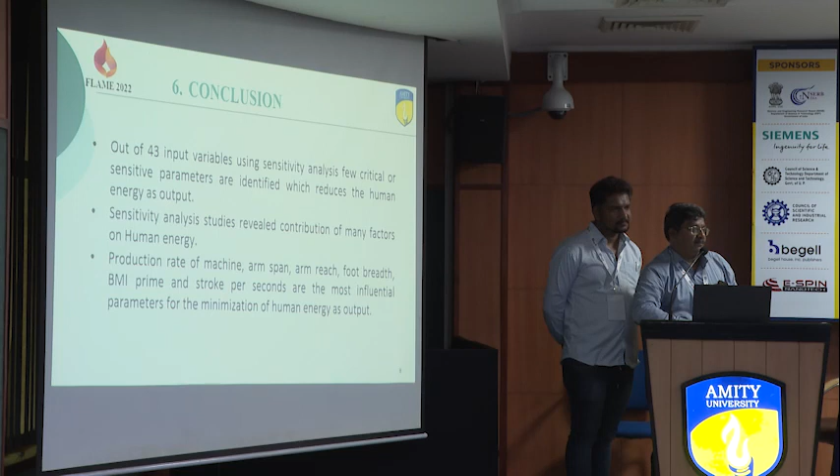Myself Neeraj Suneria, presenting on behalf of Dr. Sachin Mahakalkar sir. The paper title is Buckling Analysis of Piston Rod for Hydraulic Cylinder of Cotton Bale Press Machine. Here are the contents.

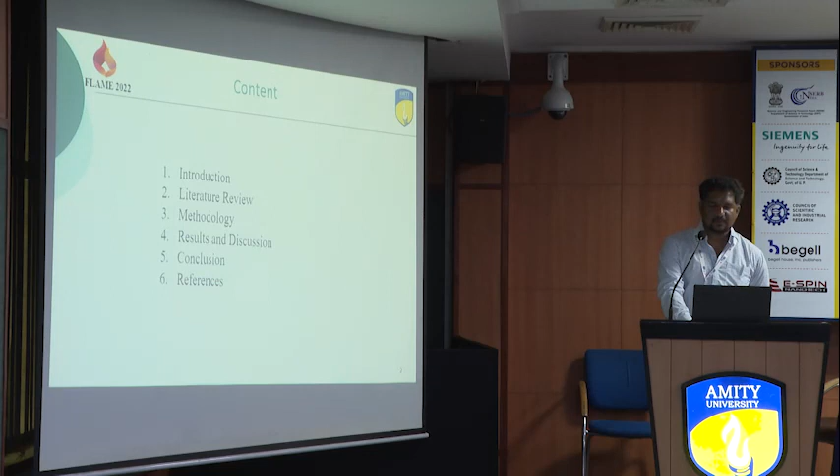Is the similar type of presentation you are having just like that? No, no sir, results are there. Yes, your paper ID is 153. Speak loudly, please.

Cotton bales are generally made up of finely processed cotton, and these are useful in various industries like bed sheets, garments, or medical industries. These bales are pressed with a machine having a cylinder and a ram. That cylinder is generally called a tramper cylinder. The normal weight of a cotton bale is around 170 kgs, and it consumes approximately 17 cubic meters of space when not compressed, so it is required to be compressed into small blocks.

This work focuses on the buckling analysis of the rod used in this cylinder, which has a dimension of 2627 mm and diameter of 70 mm. So it is a long column with a slenderness ratio of 154. Buckling will be the main consideration while analyzing this type of rod.

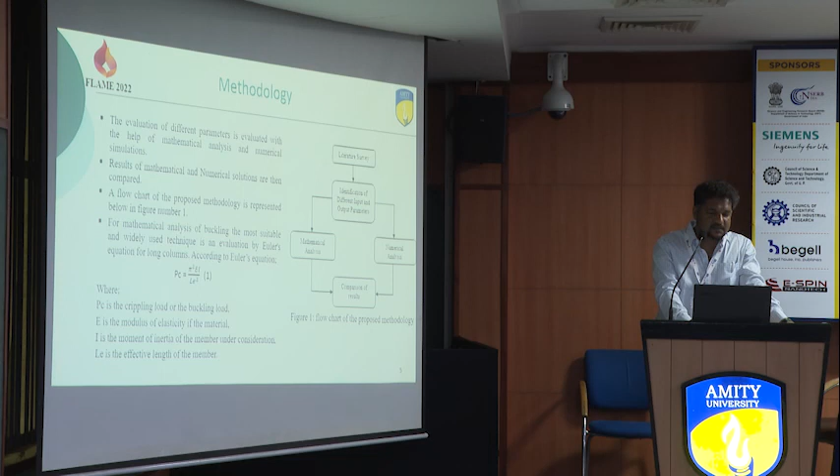I used Euler's equations for long columns: PC equals pi square EI by LE square, where PC is the crippling load, E is the modulus of elasticity or Young's modulus, I is the moment of inertia, and L is the effective length of the member, which here is 2627 mm.

I made a CAD model in CATIA software, and I used ANSYS workbench for the boundary conditions, meshing, and for solving the different equations.

The main axis to be considered is the x-axis, where the linear and angular displacement will be there.

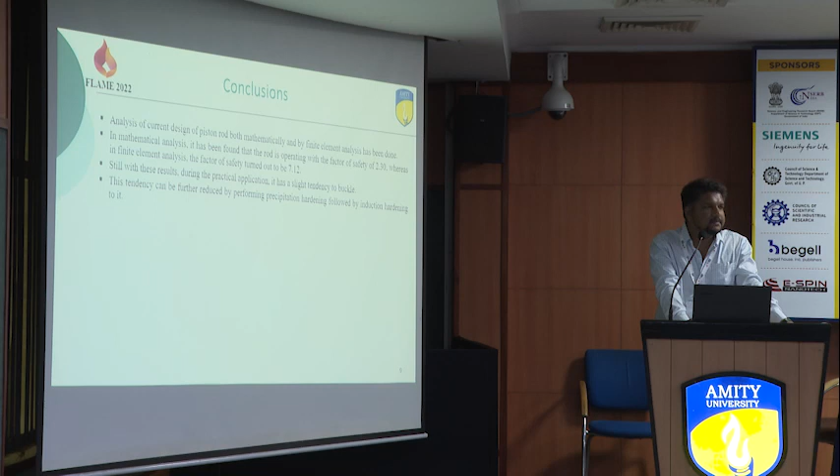Sir, unstructured mesh. Yes sir. No, 2.3 is what is coming. Yes sir, after the modified design. So it is after the modified design, and 2.3 is for the plain rod. It is around the same.

It is the same. Have you added that comparison with the mathematical model? No sir, in the same? No sir, I have not added the ANSYS simulation for that same rod, but I have added the...

Because here there is no word mentioned in the conclusion about modification, whatever you are saying. It simply shows that in mathematical analysis, the rod is operating with a factor of safety of 2, whereas in the finite element analysis the factor of safety turns out to be 7.1. So if you are comparing 2 with 7.1, the variation is more than 100%. This type of result will not be acceptable, because it should be within a certain range, plus or minus, if you are comparing your result with computational work. Hardly it should be 10 to 15%, or at max 25%.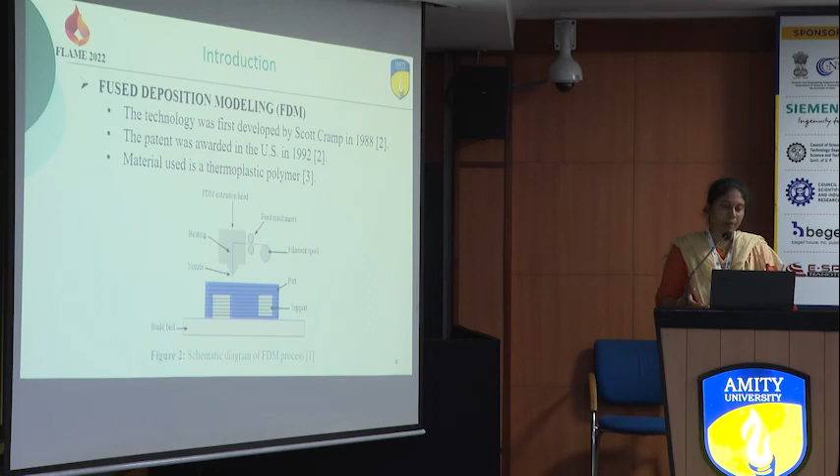So this is our literature review. In this we have found that some of the researchers have revealed that the process parameters to improve the performance characteristics should be optimized for a fabricated part.

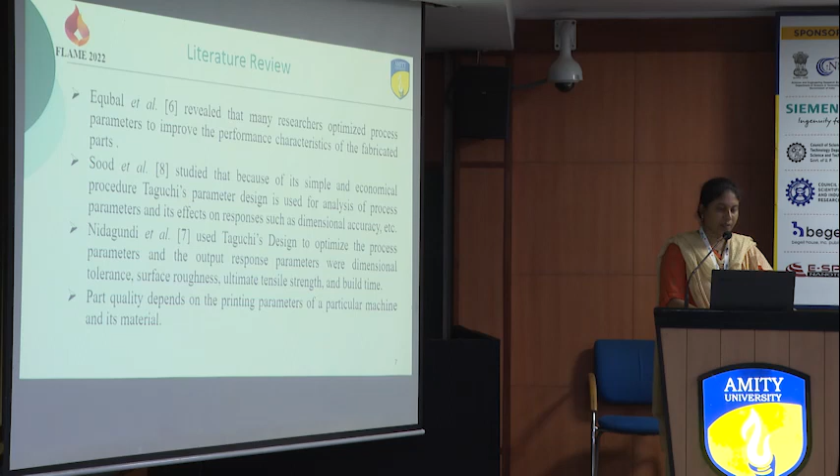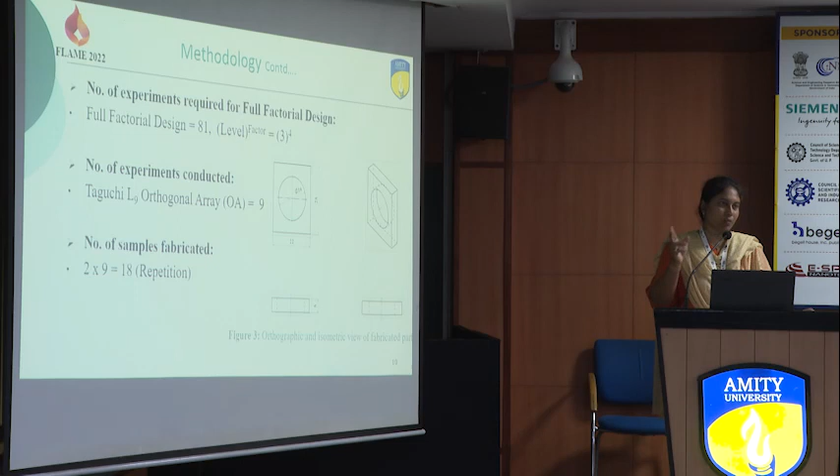If we choose the full factorial design, we would have to perform 81 experiments, but with the help of orthogonal array, we got this reduced to 9 experiments. We have taken repetition for the length and for the diameter, so it is 18 in number. These are the 9 experimental runs for different parameters. We have taken 9 experiments, but these 9 experiments give us the whole information of the significance of the parameters.

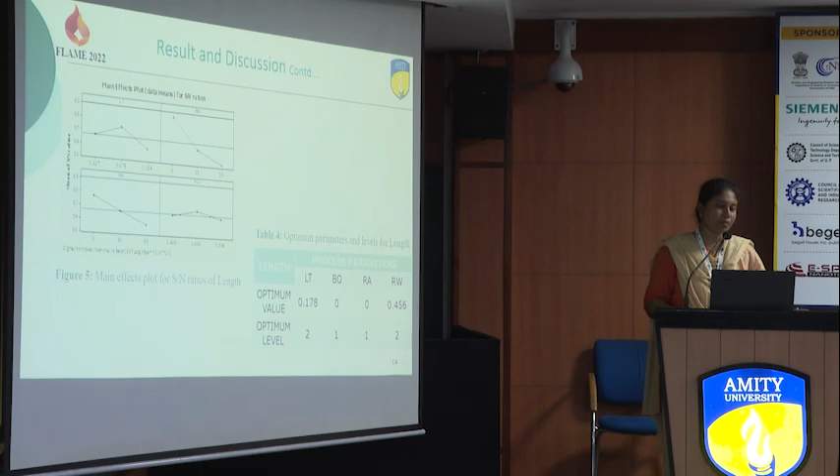So this is the part. These are the signal to noise ratios which we have got with the help of that formula. And this is the result and discussion. Here we can see in the graph the points which are significant, the optimum values of different parameters we can see in the graphs. This is for the length and this is for the diameter.

So we have concluded that with signal to noise ratio analysis, using the table which I have shown, we got the significant optimum values of the parameters and their levels. With the help of that we can get good dimensional accuracy. With ANOVA, we have found that build orientation contributes more in the linear dimension, and layer thickness contributes more in the circular dimension.

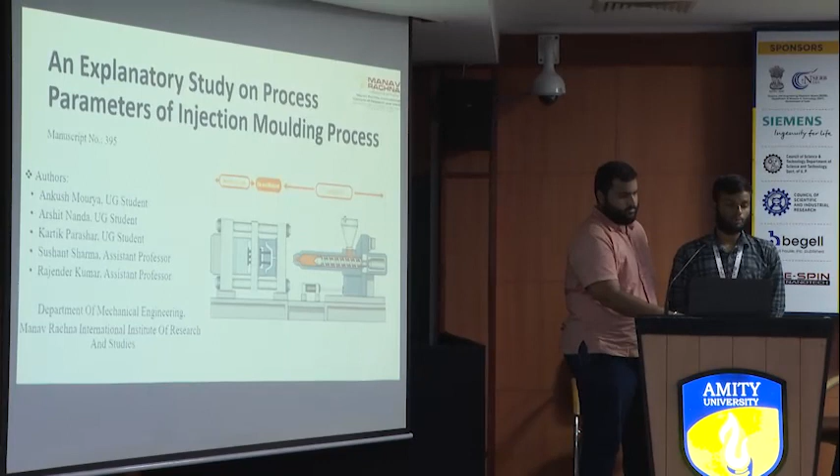The topic of our study is an explanatory study on process parameters of injection molding process. These are the outlines which we will be going through. Introduction. First of all, what are the plastics? Plastics are the polymers, which are nothing but the repetition of the monomers. Plastics are generally divided into two major categories. First is thermoplastic and second is...

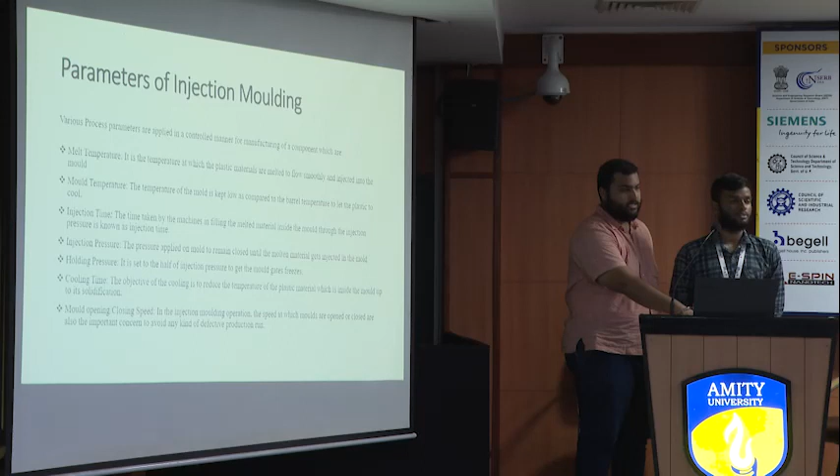Your paper ID? Sir, it is a study paper. Your paper ID? Sir, 395. Yes, sir. So these are the process parameters in injection molding machine, which are applied in a controlled manner for manufacturing the component.

You have read some research papers also regarding that? Yes, sir. Okay, which years' research papers have you considered for this study? From 1970 to 2019. Okay, so almost around 20 papers you read? Sir, 48. You have gone through 48 papers? Yes, sir. You read all, understood? Sir, we have some issues with the methods used in there. They were not all clear. I agree. If you have studied 48 papers, you must be.

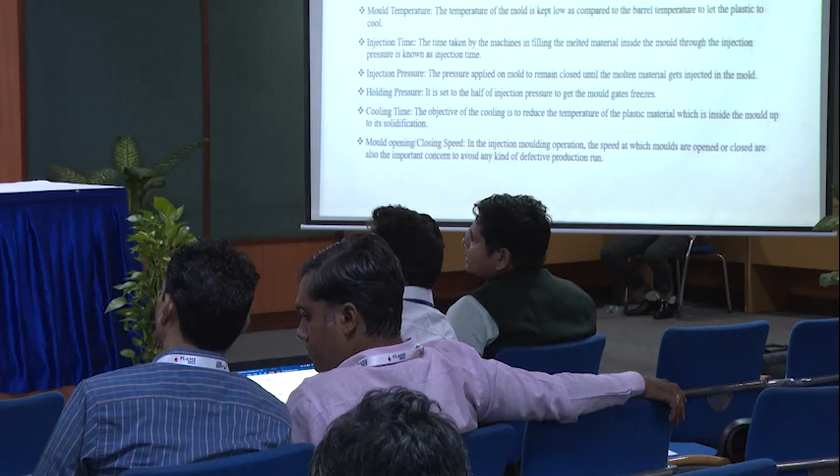Sir, we have studied lots of parameters and defects. Okay, then tell me what is the conclusion you found from this era. What is basically the evolution, from the initial stage to 2019? What difference did you get? In the form of a problem, a gap, anything which has not been explored. We don't want theory definitions. What is the purpose of that?

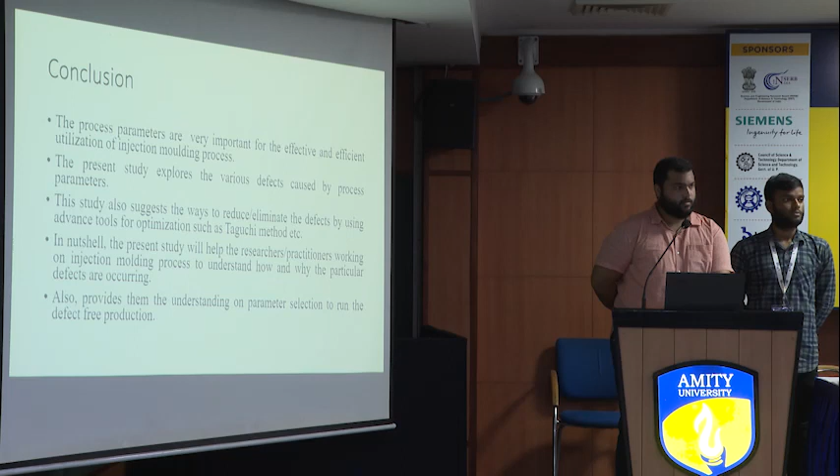Injection molding optimization. If you see what problem comes today, like Neelkamal, they make chairs, right? The first few chairs they make, like 50 chairs, have some defects in them. By the time it heats up and they get the flow going one after another, the first 40 chairs get rejected. So that part needs to be minimized, the material that goes to waste. That's the main problem.

Any idea how you are going to minimize those defects? Different cooling channel designs, different injection molding pressures, different cycle times and all. Based on that, the defects in those initial 40 products can be minimized, so that ultimately the production can be enhanced. Very good. We just want to know that this work can be further extended, that this is the gap which we have identified from these research papers. That is the main thing we are expecting. So this is very good. Okay, good.

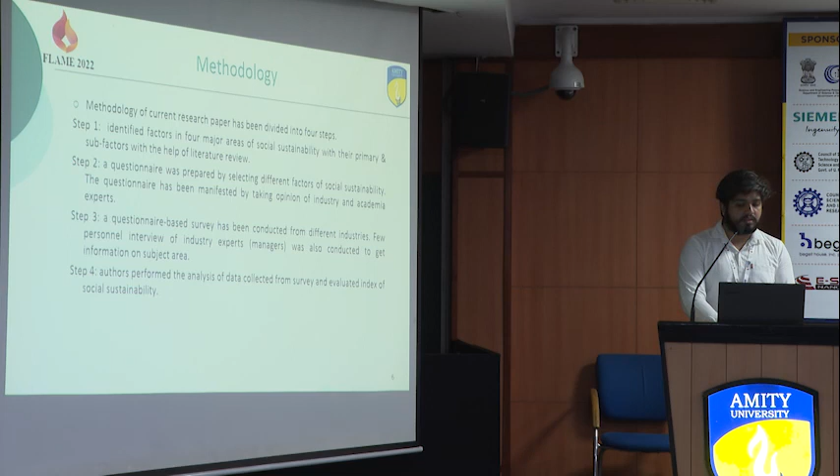I'll be quick with the slides. Yes, sir. So then I had these two research questions: what are the aspects, primary and sub factors, and what is the sustainable index of every major industry? So in my methodology, I created a questionnaire. I found all the sub factors with the help of the literature review. I put up a questionnaire with industry and academic experts, surveyed it, and calculated the index of social sustainability. So these are the results of my social sustainability.

Then I went for the sectors of different industries. Let's say utilities and services, I only had one industry in it, the first one. Okay, which method did you apply to get the results? So basically, it's a process where we have their existing social sustainability and their target social sustainability. According to that, we find out their mean and then we calculate it.

Yes, sir. B.Tech mechanical student, sir. That's okay. Then it's okay.

Yes, sir. So let's say now the total doesn't become 100. So there are other factors such as economical and environmental factors which are covered by other people. But yeah, I am focusing on the social sustainability. So my conclusion is that 25% to 30% efforts towards the social employment aspects are needed, especially in manufacturing, construction, retail. But in healthcare, at least 17 to 20% of business policies and practices should be changed, so their social sustainability can be improved. Yeah, so this is the basic conclusion.

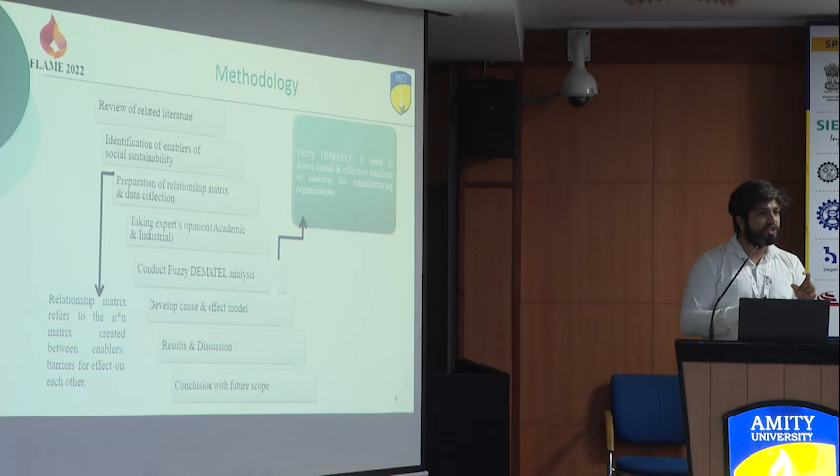Let's say if I have a value from 0 to 4 in my questionnaire or in my relationship matrix, the fuzzy scale puts 0 as 0, 0 and 0.25. Let's say 2, then it goes for 1.75, 2 and 2.25. Let's say 4, then it goes for 3.75, 4 and 4. So it basically creates a more accurate and mean result on the effect of each enabler on each other.

Right, I'll go ahead. So this was a cause and effect diagram. The fuzzy DEMATEL method also gives us the cause and effect diagram. So what is causal variable and what is effect variable here? Causal variables are the variables which we can't control, and because of which our effect variables get affected. So causal variables are such as top management policies, government policies, uncertainty of pandemic, or cultural traditions.

On which parameter you applied triangular fuzzy? What, sir? Triangular fuzzy method you have applied, on which parameter? So on the relationship matrix, I had this fuzzy DEMATEL method, although it's a very long process. Fuzzy DEMATEL is basically decision-making trial and evaluation laboratory. You're using so many words, but where is the decision matrix? So actually, I can't show it here. It's very big, so I could not fit it in the PPT. How big is this? I have it in my paper, sir.

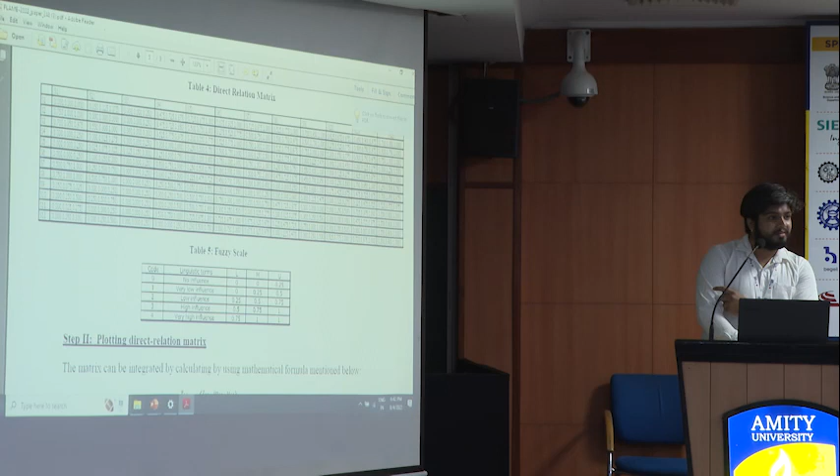Wait, I'll just show it. In terms of rows and columns, how much? Sir, actually, it is a 12 cross 12 matrix, but each of the values has around 3 values, like this. I want to see that formula actually. Can you explain this? Yes, sir, definitely. So basically, it shows us whatever the i and j quantities are. It is from this relationship matrix here.

So I generated it on Excel. I was not able to find any fuzzy DEMATEL tool to solve this matrix, so I generated it on the basis of the formula on Excel. On Excel, we can put up the formulas. But how is the loop there? Yes, sir. Actually, all the formulas and loops are there on Excel. Normal, basic MS Excel.

Can you do the programming? I have done basic. Okay, which tool have you used? So I have used normal basic Excel here.

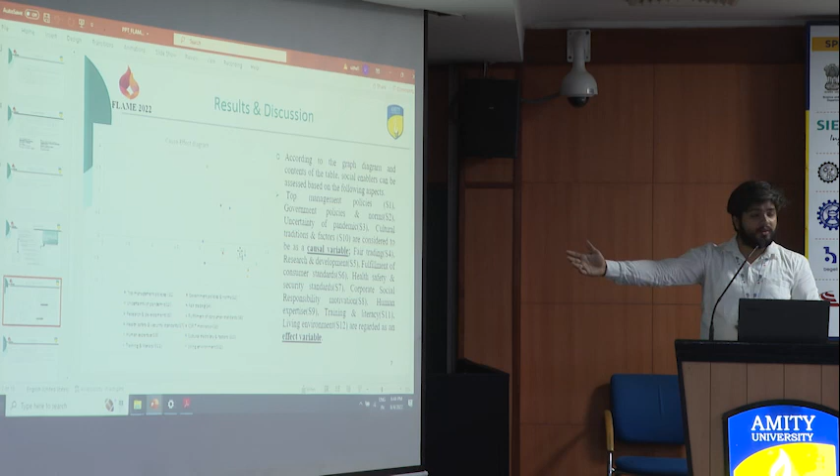Yes, sir. So should I conclude my PPT? According to my results and discussion, these are the top management policies, government policies, uncertainty of pandemic, cultural traditions and factors. These are the causal variables which we can't control for any industry. But there are other factors such as fair trading, research and development, fulfillment of consumer standards, health, safety and security standards. These kinds of factors we can control, so we can eventually improve our social sustainability in the post-COVID era in our industries, sir.

Yes. Wait, I'll just... Yeah. This is the conclusion. So let's say if we are trying to set up any industry in the post-COVID era, these are the factors which are there. Or if any industry has had very much loss in this time, they can focus on these effect variables and improve them, so their sustainability will get better and their productivity will get better. But these are the variables which nobody can control, so they can avoid them.

Any work done on quality in that? Because sometimes in the case of a questionnaire, we get forced input. I understand, so the people... We send the form, fill it and send it back. So I had a trick for it. I went to the industries by myself. I gave them the form. I also gave them an offer that if they fill my form correctly, then I'll tell them some ways by which their productivity can get increased.